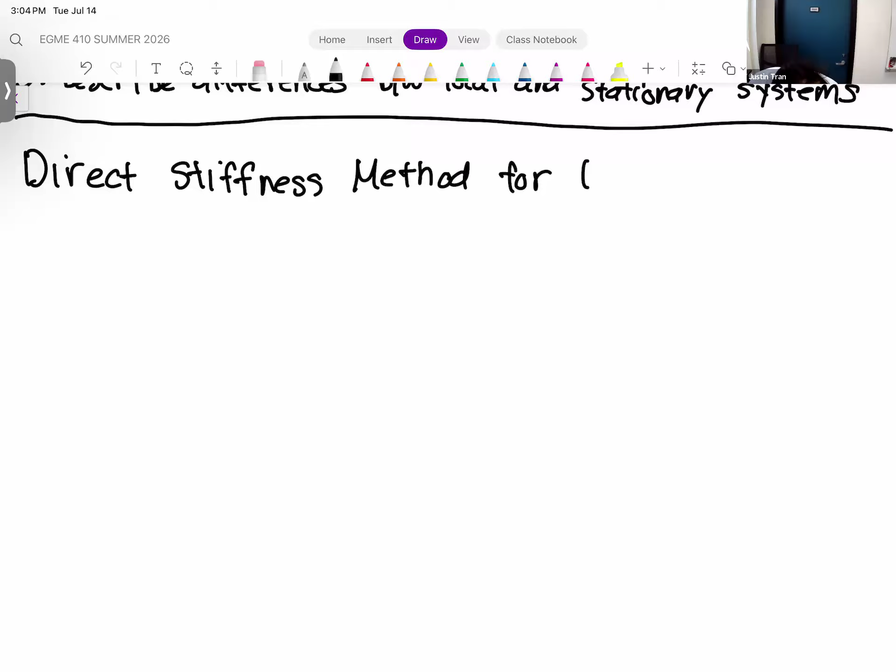I know I've said this ad nauseam, probably more times than it's almost like a broken record at this point, but finite elements is merely just a technique for solving differential equations numerically.

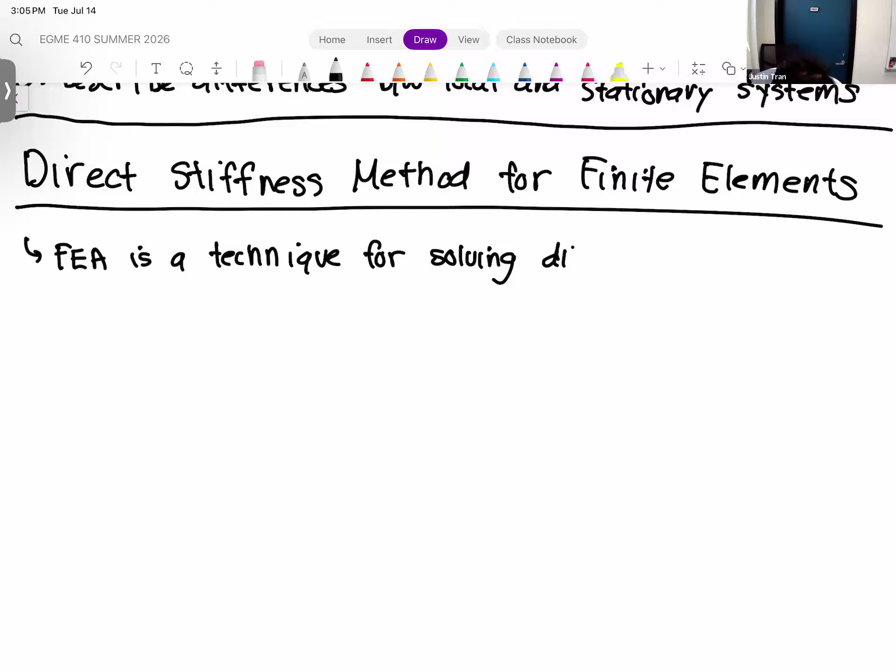I think I've mentioned this at least once every day this summer, probably more than once, but we haven't really talked about how this is done. The interesting thing is that finite elements is not just one particular technique. There are actually different ways to implement the finite element type of analysis.

Even among those different implementations, there are different variations based on certain types of scenarios, situations, or equations. So finite elements is actually a very broad topic to discuss. What we're going to cover in this class is what I would consider to be the very simplest implementation of the finite element technique, which is the direct stiffness method.

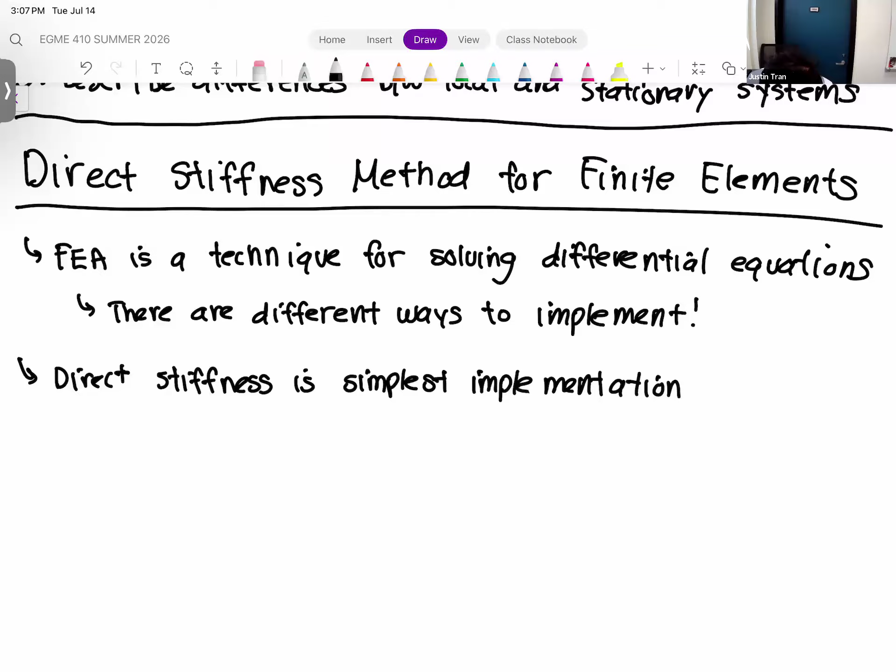Which, for this class, I think is very appropriate, because if we were to go beyond this, it would turn into a graduate level class, which we do have here — it's EGME 541. So if you were ever curious about diving further into finite element theory, that's the one you would take if you were to come back for grad school.

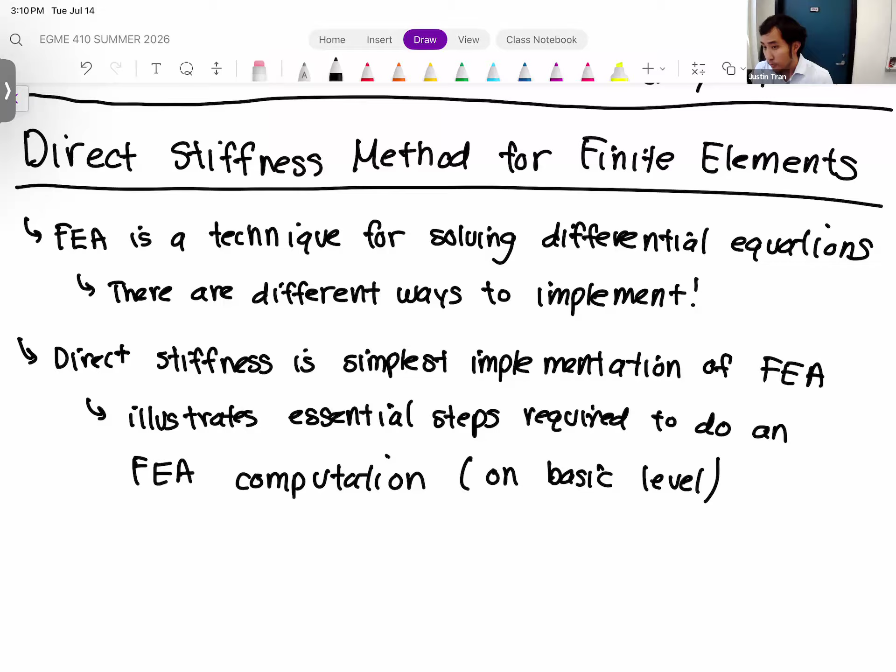But if you were to look inside ANSYS itself to see what it's actually doing underneath the hood as you do these steps, that's what I mean by the distinction. What we're going to cover today and for the rest of class on theory is specifically the FEA computation, which is different from the steps for running an FEA simulation in ANSYS.

It's a little confusing, but once we get used to this process and see what's involved, the distinction will be clearer. Before we get into the nitty gritty, I want to list out those steps. Some steps overlap with the practical ANSYS steps we're accustomed to, but there are additional steps which ANSYS essentially hides from you, since it's unnecessary for a general user to see. Step one is the same — we're going to establish our geometry.

Okay, which is the same as establishing our domain, right? So we have to have a subject, and so no matter how we approach our finite element simulation, we have to know what we're simulating on.

Step two, also very similar to our ANSYS processes, is that we need to essentially put a mesh on our geometry. But I'm going to be a little bit more specific here. In step two, we're going to break up our geometry into elements that we can process.

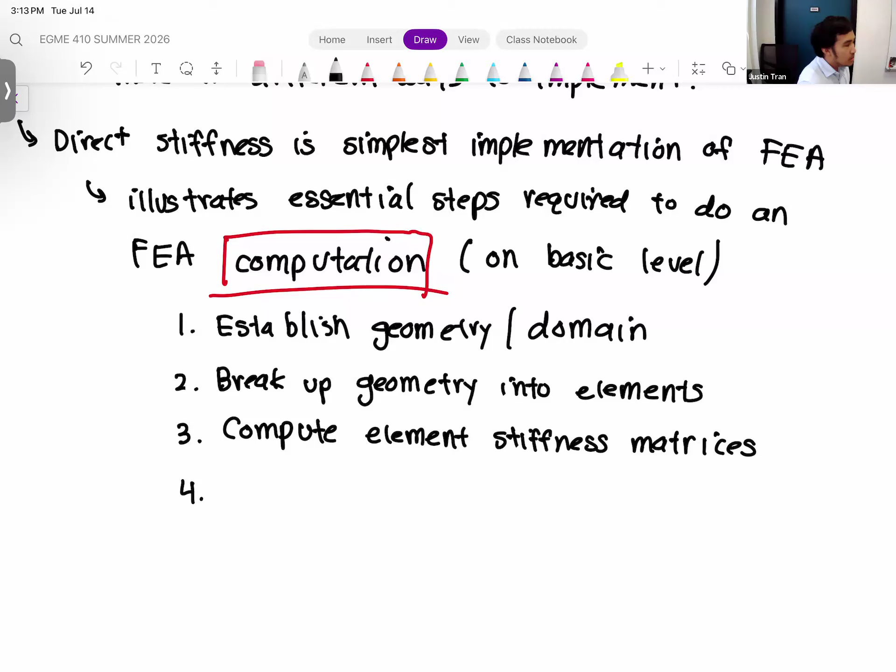Step four, after we compute all of the element stiffness matrices for all of the elements, we need to assemble them all together. We'll talk about what that process entails, but the result of step four is that we obtain a single global linear system.

All right, and then once you do that, step five will sound familiar, but the way that we actually apply that to our calculations is going to be different. So step five is we need to apply our boundary conditions, which up until this point in ANSYS has just involved clicking and establishing forces and fixed constraints. Through this direct stiffness method, you'll see mathematically how that actually works.

All right, and then after step five, we need to solve. To be more specific, we're going to solve our linear system, and that will give us our result.

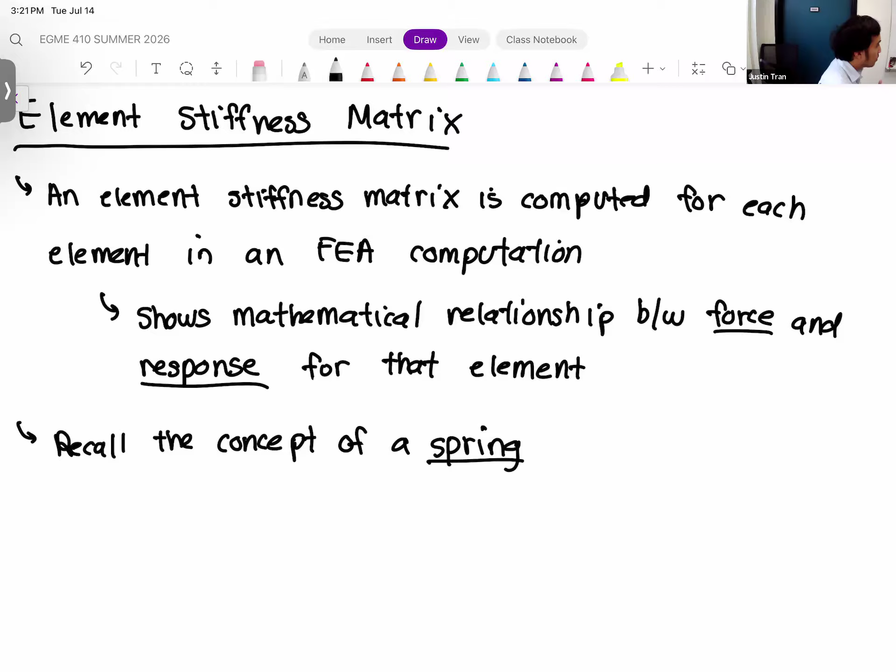So what do I mean by that? Let's bring up an old friend. Hopefully you've discussed how springs work, in multiple classes, but at least in your physics class. A spring is a very basic type of mechanical component, right? It has the ability to stretch and compress. The most basic relationship here is we have a fixed wall, and our spring is attached to the wall, like that.

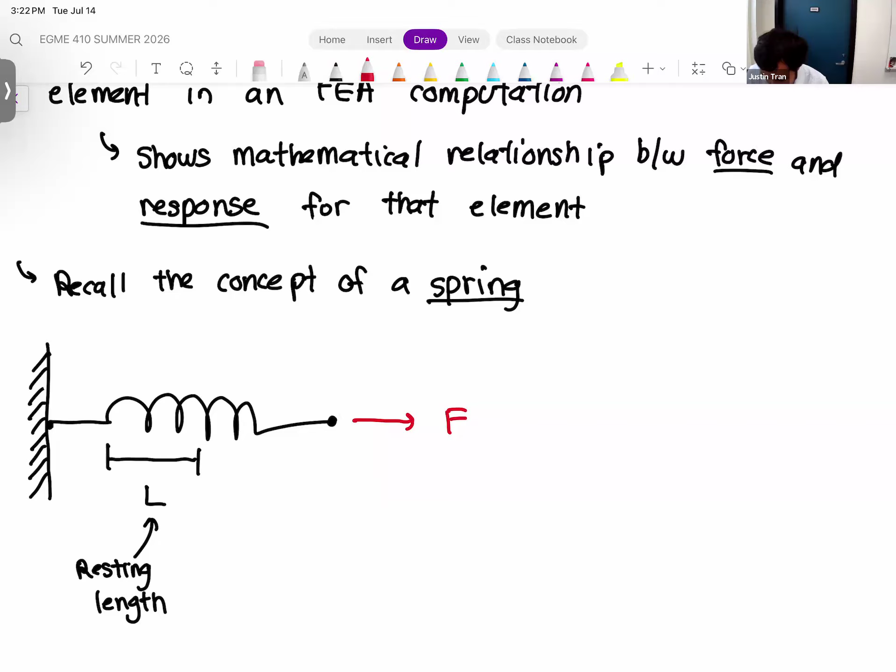Let's say we're applying a force to the spring. In this case we have a tensile force being applied, so the spring is being pulled away from the wall. What we expect is that the spring is going to stretch. Maybe before we apply the force, the spring had some length here, which we'll call L, the resting length of the spring. But as a result of applying the force, the spring stretches by a certain amount, which we'll call d.

F right here is our applied tensile force. That's the general behavior of a spring, and actually of most elastic structures. If you apply a force, we expect the structure to deform in that way, just like we've done in our ANSYS simulations. Now for a spring, the only difference is that we actually have an equation that can relate the force to its stretch length.

So the equation is: we have the force, F, is equal to what we call the spring constant for the spring, which we often give the symbol K, multiplied by the deformation of the spring. This equation is known as Hooke's law for springs. Very simply, force is equal to the spring constant multiplied by the deformation, d.

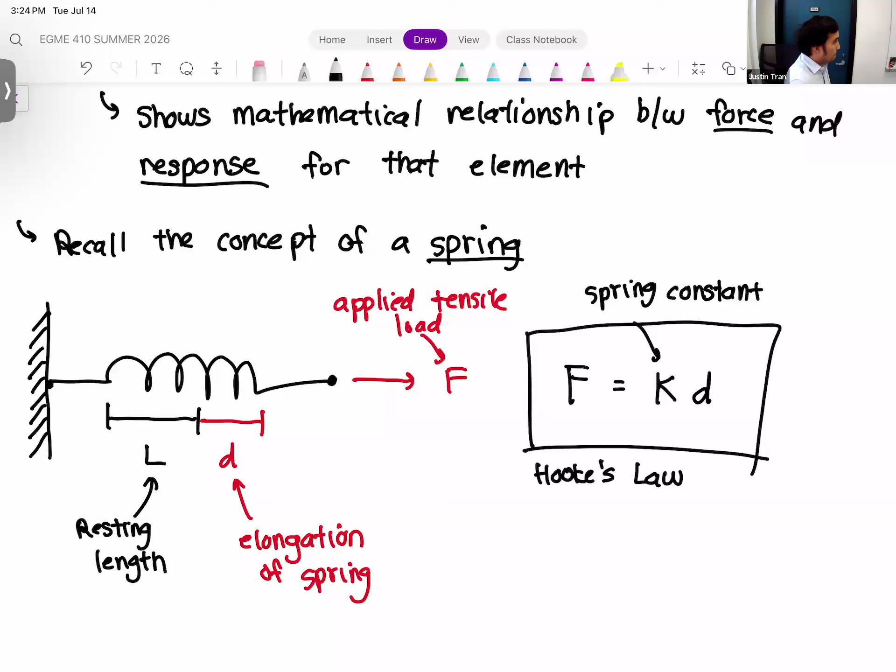So why do I bring this up? I mentioned we want to cover this concept of the element stiffness matrix, which shows a mathematical relationship between force and response. If we look at this simple spring equation, it's a great illustration of that exact concept: we have a mechanical structure, a force applied to it, and this equation tells us how that structure is going to respond, where the force is some applied external force.

If you apply an external force to a spring, it's going to respond by deforming. The deformation amount, d, whether elongation or compression, is the response of the structure in response to that applied force.

So what we have here is a simple equation that relates the force to the structural response. Now, our equation doesn't involve just those two variables. The spring constant is there as well.

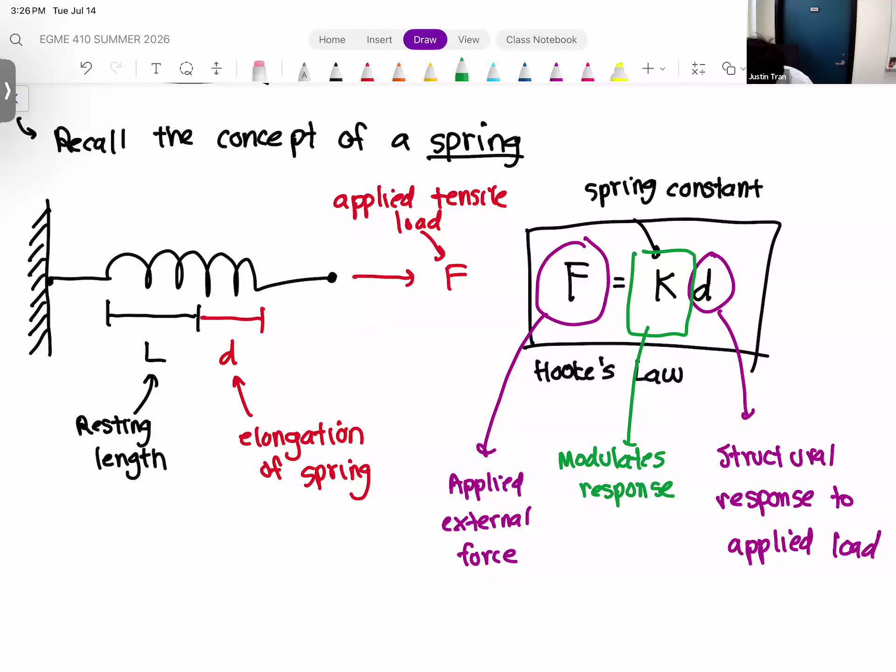That spring constant is there to illustrate the fact that whatever response we get depends on the nature, the material, and the size of the spring itself, which is illustrated by that spring constant.

So, very simple equation, right? Probably an equation you've never thought more than three times about. But there's a lot of really interesting information we can glean, a lot of different interesting ways we can interpret it, which is going to help us with our understanding of the element stiffness matrix.

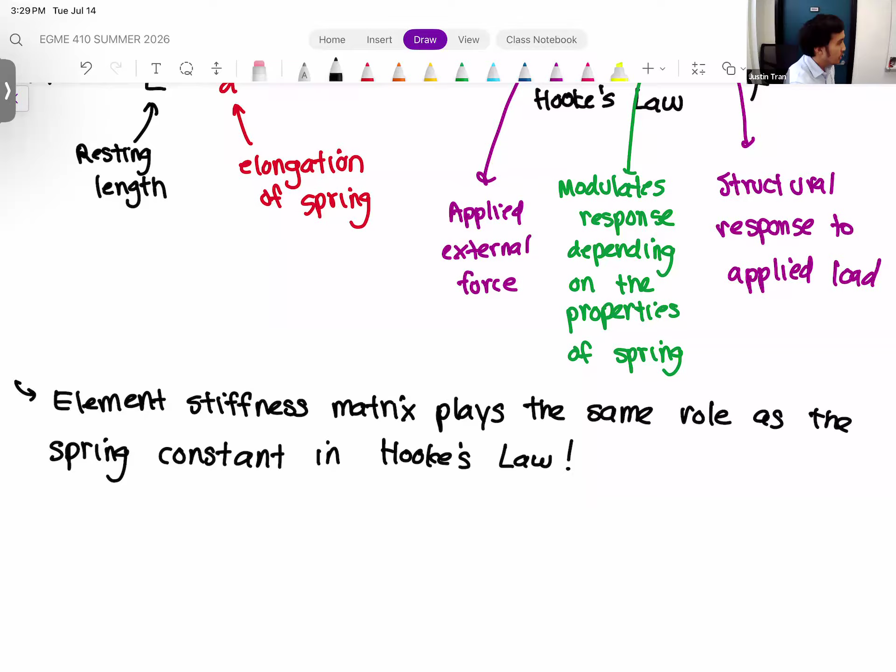Just like we've seen in our ANSYS simulations. The element stiffness matrix encapsulates that information and puts it in a mathematical way. So, the exact definition of the element stiffness matrix...

The element stiffness matrix combines all properties of our element itself, including its material properties, including its geometry.

So our element stiffness matrix will combine all of the relevant properties associated with that finite element. The main ones are going to be your geometry and material properties. That's mostly what we're going to concern ourselves with in this class, but there are other factors as well.

So it combines all these properties and gives a relationship in terms of how that finite element is going to respond to forces in a system of linear equations.

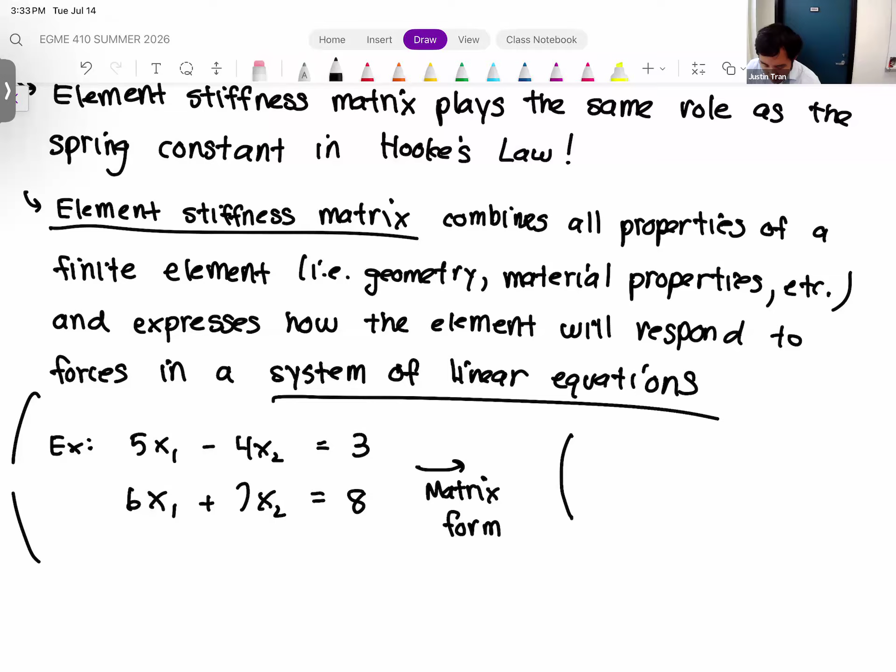So essentially, the matrix form for this set of equations is 5, minus 4, 6, 7, multiplied by x1, x2, equal to 3, 8. So that matrix set of equations is equivalent to our system of two equations, two unknowns. It just expresses it in a different way.

Now, matrix form is quite popular. It is used a lot. Maybe not necessarily for small systems like this, but if you have a lot of equations and a lot of unknowns, matrix form is quite nice. A lot of linear algebra theory and linear solver methods are based on this kind of matrix form.

So the idea with the element stiffness matrix is that our element stiffness matrix is actually going to play the role of this matrix right here. It's going to be a matrix of constants, and those constants are going to be determined based on the geometry and material properties of that element, relating the response to the force applied on that element.

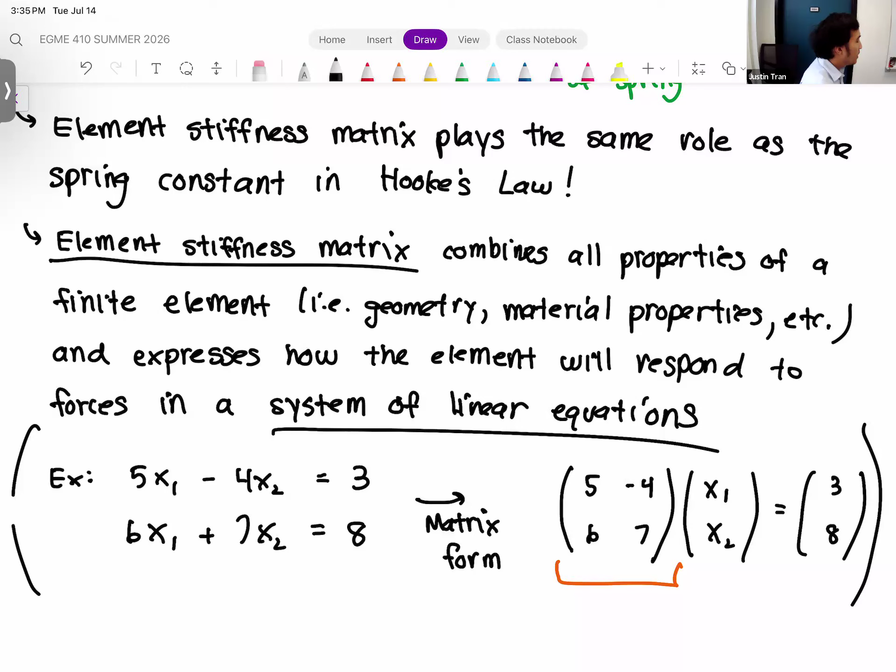So how do we actually find the element stiffness matrices? This is the part where we're going to kind of gloss over a lot of those details. Actually deriving an element stiffness matrix is pretty hard, and if we want to do this in the more traditional way, that would require more advanced math that I don't really want to get into in this class.

I think the only thing I'll say is that the derivation of these element stiffness matrices is quite difficult. It depends not only on the shape of the element, but also on the governing equations we're trying to solve. So the element stiffness matrix for a static structural simulation is going to look different than the one for a static thermal situation.

As you get into more advanced finite elements, a lot of the theory is centered around how we derive expressions for these element stiffness matrices. So we are going to simplify it quite a bit, and that's where the direct stiffness method gets its name, because we're going to more or less directly compute these element stiffness matrices, circumventing the entire process of the governing equations. But even then, it's still going to provide us a good illustration of the finite element process.

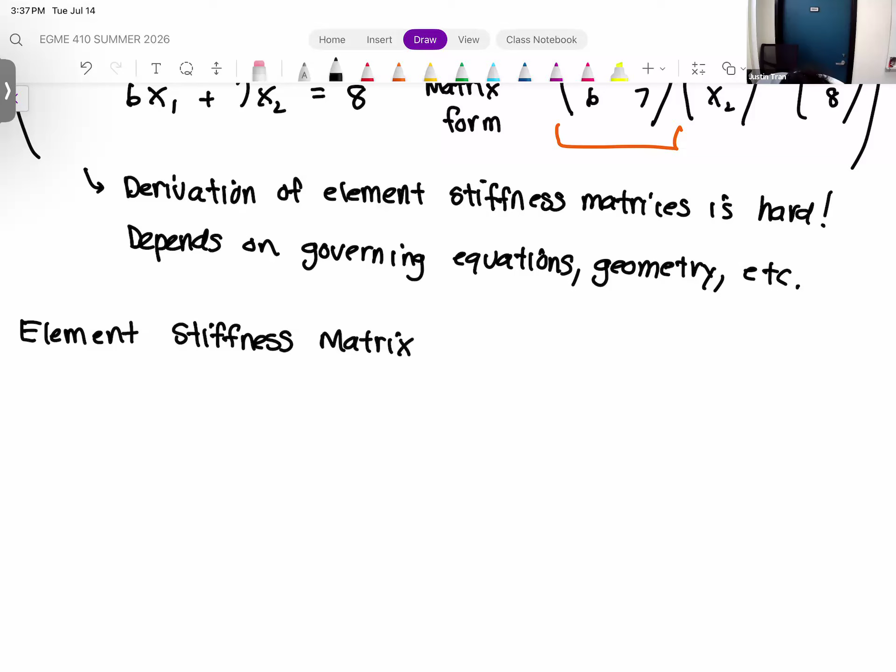So there will be at least three direct stiffness elements that we're going to cover in this class. The first one's going to be springs, which is what we're going to do today. We'll probably get to trusses by the end of this week, and then cover beams sometime next week. Okay, so let's start with the spring.

So you might be thinking, wait a minute, we've already discussed springs, right? We already have an equation that covers springs, we already have Hooke's law. So how can we get an element stiffness matrix from a system that we already kind of understand? Well...

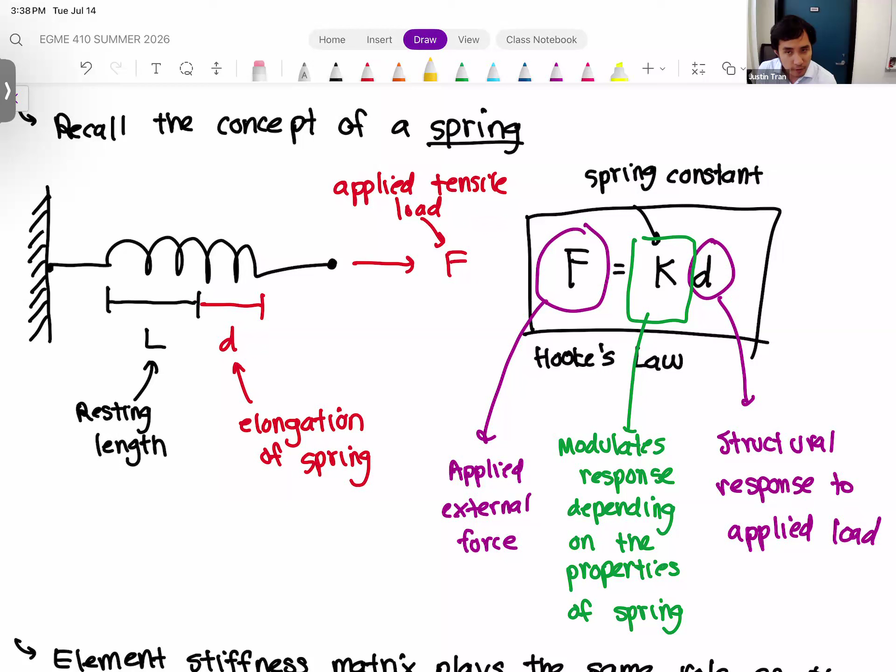The way that we obtained Hooke's law here was we had to assume that one side of the spring was fixed. The left-hand side of the spring was fixed to a wall. That way, our displacement or deformation was very easy to measure because we know one end is already going to be fixed. But what if we loosen that restriction? What if we take just an arbitrary spring with a force applied on each end?

Okay, so let's look at a spring, but instead of a force being applied only on one side and the other side being fixed, let's say we have a spring where we have a force on either side. They can have arbitrary magnitudes and arbitrary directions, and we're going to measure the deformation on each side of the spring as well.

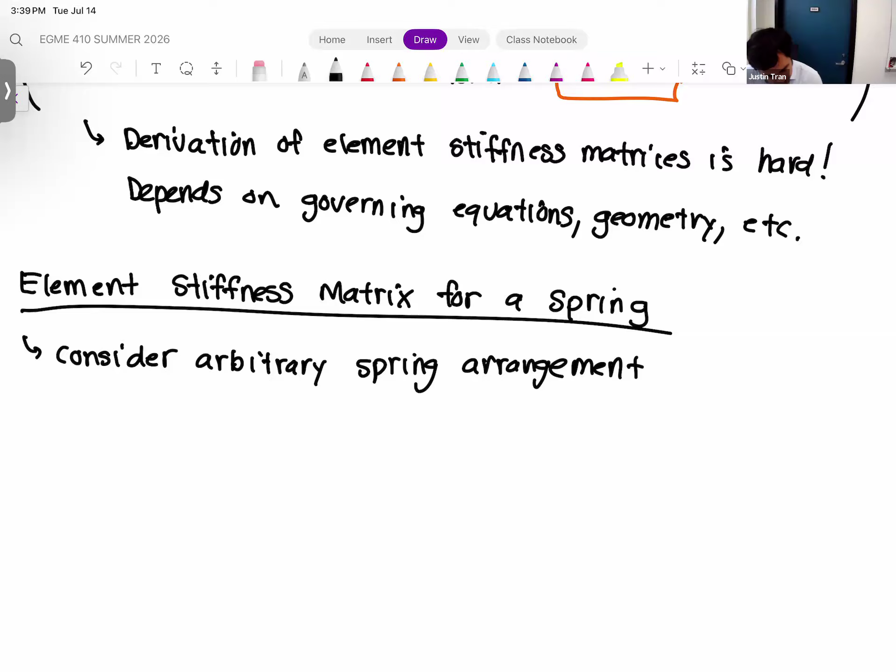So you have a spring like this. It's more or less floating in air now, not fixed to a wall. Let's say we have a force applied on the left node, F1, and a force applied on the right node, F2. Those are external forces, and right now they are completely arbitrary. I've drawn them going to the right just as a matter of convention, since generally the positive x direction goes from left to right. But very easily we could swap their directions as well.

And then in response, we're going to expect the spring to deform as well. Let me keep it consistent with the previous terminology—let's call it D1 and D2. So D1 and D2 are the arbitrary deformations of both ends of the spring.

So what we want to do is derive an element stiffness matrix that's going to relate or give us a mathematical relationship between the forces F1 and F2 and the corresponding responses D1 and D2.

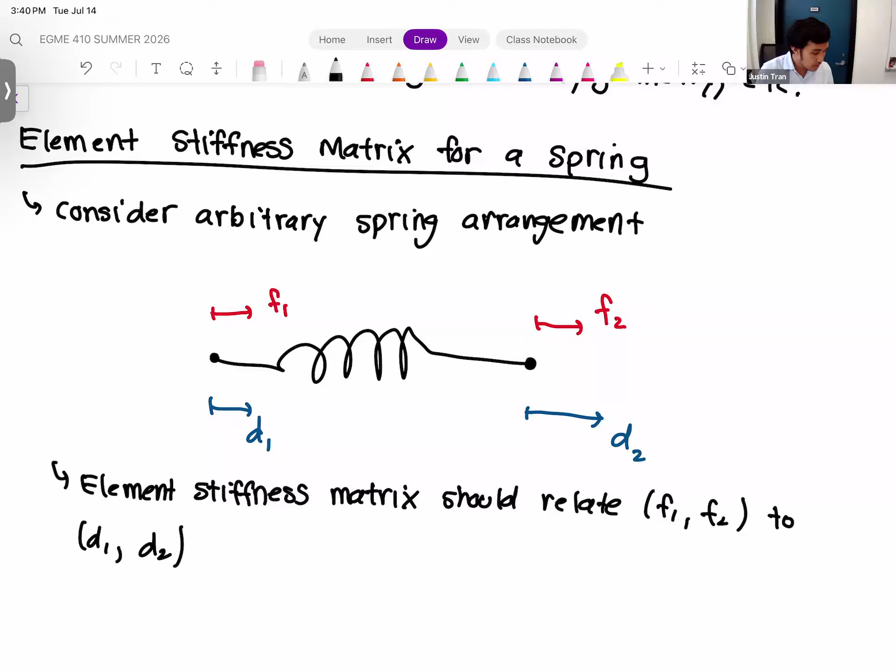All right, so essentially we seek a system that's going to look something like this. If we put it in matrix form, we have a vector F1, F2 equal to the stiffness matrix K multiplied by the displacement vector D1 and D2.

Okay, so we basically need to come up with two equations here: an equation for F1 and an equation for F2.

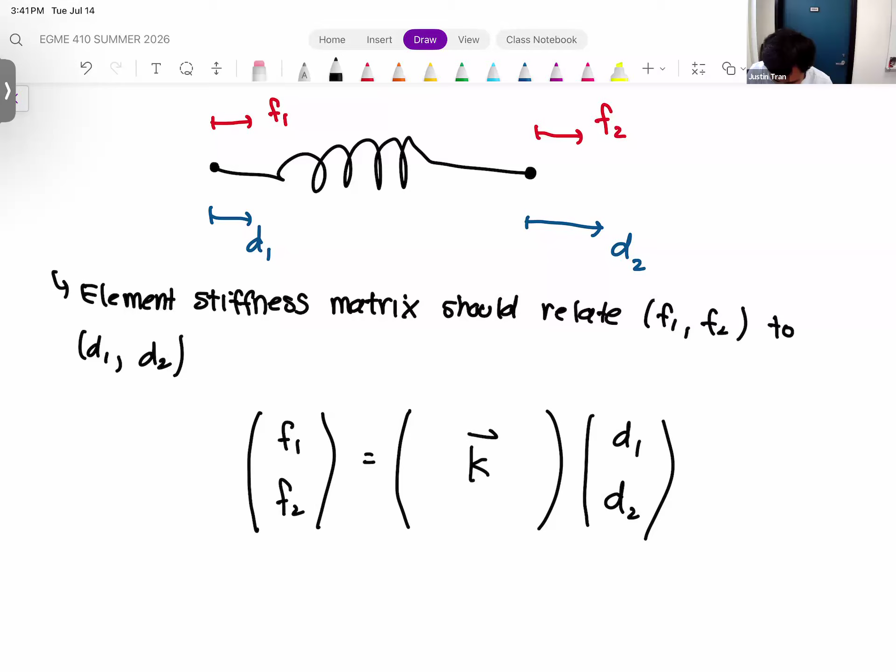All right, so to basically derive this K, we're going to look at a very specific scenario, and that scenario is going to give us the blueprint for solving these kinds of mathematical relationships. Let's consider a spring that's in static equilibrium with a tensile force applied on both ends.

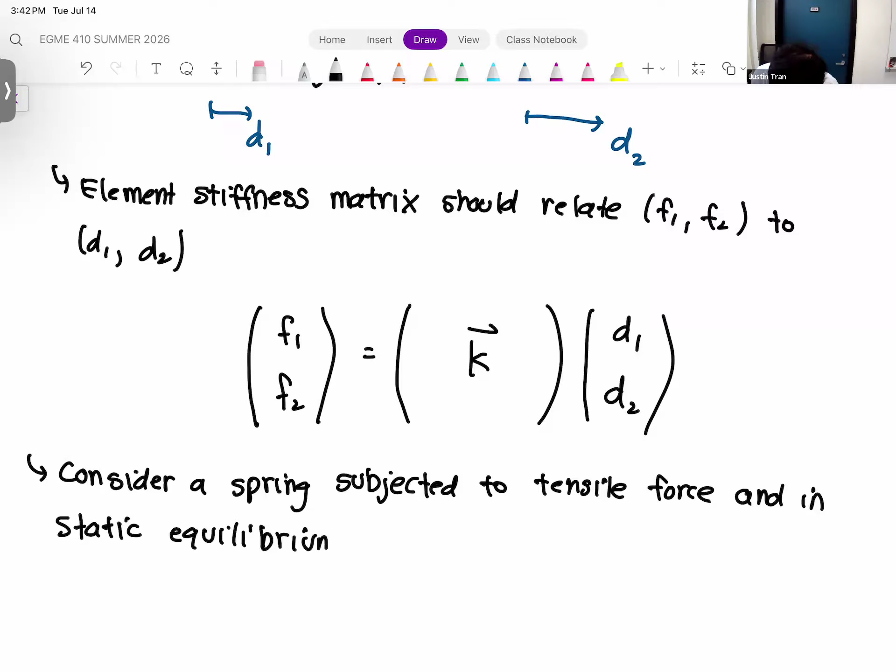So similar to the initial situation above, but we're going to be a bit more general here. We're going to have a tensile force applied on both ends, and because we are in static equilibrium, the magnitude of the forces applied on both ends have to be equal and opposite.

Okay, so we have our spring just like this. We're going to apply a tensile force, meaning we apply a force stretching the spring over to the right on the right-hand side, and on the left-hand side, we have our forces pulling it to the left. Those forces are equal and opposite, so T on the left has to equal T on the right, otherwise we wouldn't have static equilibrium.

And then what do we expect as a response? We expect the spring to elongate. We expect the left node to go to the left, D1, and the right node to go to the right, D2, relative to its resting position. So we expect both nodes to move apart from the center.

So under this configuration, we can basically compute the total deformation of the spring. Different from before, where one end was fixed, in this situation both ends are moving apart from each other.

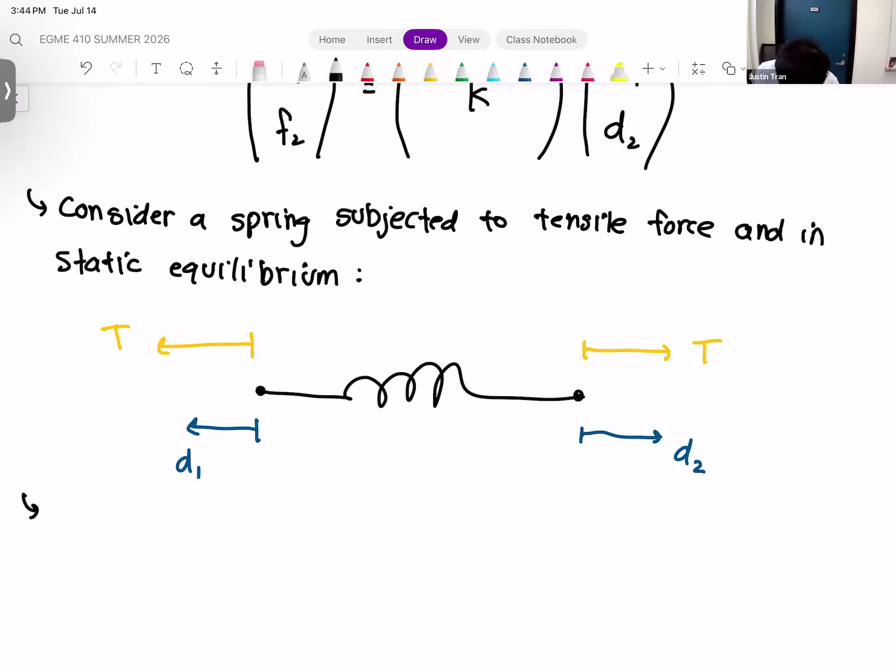So the total deformation of the spring is basically going to be the sum of D2 and D1. Let's say they both move an equal amount—say they both move half an inch. D2 moves to the right by half an inch, D1 moves to the left by half an inch. That means the total deformation is going to be 1 inch.

But in this situation, we do have to respect the directionality of our coordinate system. If we assume the positive x direction goes to the right, as it typically is, that means D2 is a positive deformation and D1 is a negative deformation. So the total deformation therefore is D2 minus D1.

Even though this spring has multiple degrees of freedom, and we now have two degrees of response here, the spring is still a spring. No matter how we dress it up, a spring is going to follow spring rules, do spring stuff. So we can still use Hooke's law to relate the tensile force to the total deformation.

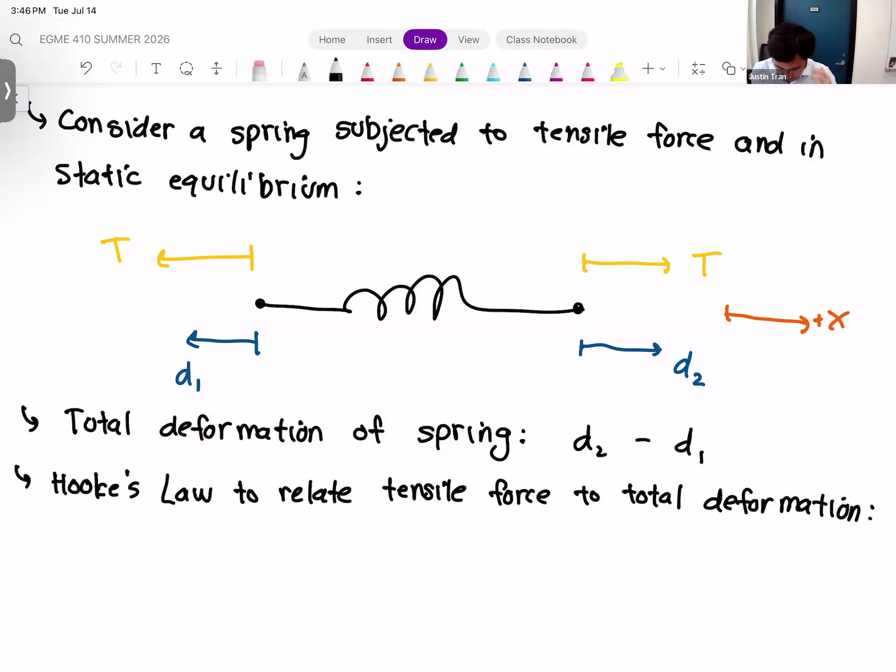And so the tensile force applied onto the spring, T, is equal to D2 minus D1 multiplied by K, which is the spring constant for the spring. We'll assume that we know the spring constant, otherwise we wouldn't be able to do this calculation.

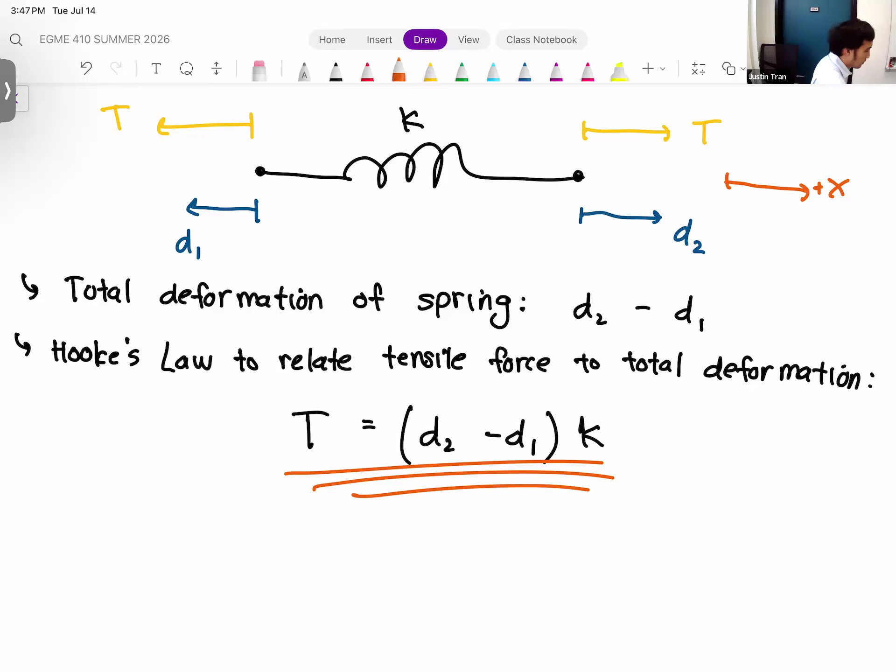And so with this equation, we have a linear equation that relates the total deformation of the spring to the tensile force. Now the next step is to take this equation and relate it to this one up here. Remember, we need two equations here: one equation for F1 and another equation for F2. That's going to give us our matrix set of equations for the entire system.

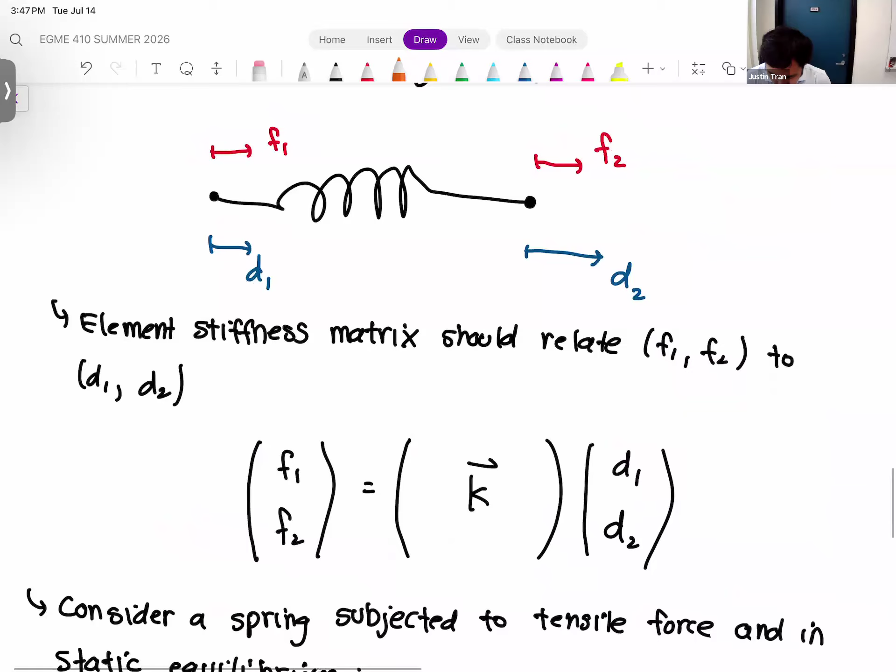So what I'm going to do is take this figure here and overlay it with this one right here, because this figure up here with F1, F2, this is what I'd call the figure for the general case, where F1 and F2 are arbitrary. And this situation with the equal and opposite tensile force is a more specific case.

So if we overlay our convention, on the left-hand side at node 1 we have F1 going to the right, and F2 is defined as going to the right as well. Remember, F1 and F2 were nothing more than the forces being applied on the two ends of the spring. And we have that here exactly already: we're applying a tensile force T on both ends of the spring. The only difference is that the directions we chose for the tensile force are different than what we chose originally for the general case.

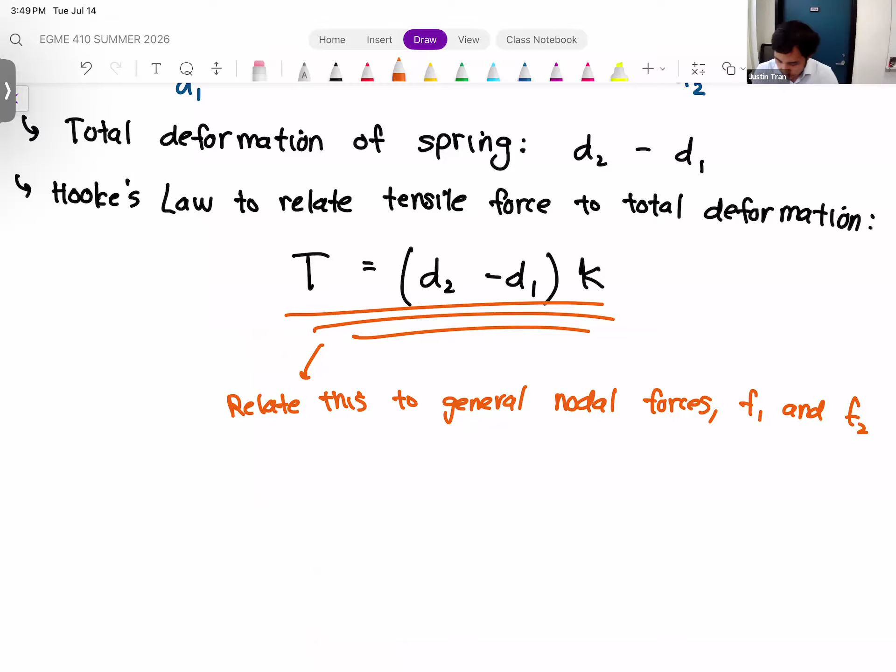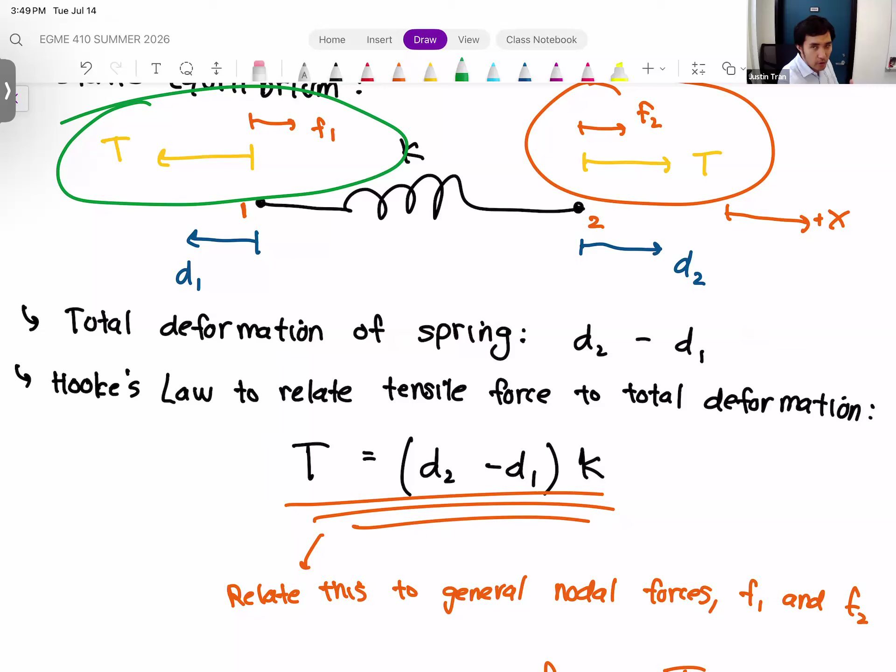So we're going to relate this general equation to our generic F1, F2 forces. Based on this figure, let's start with F2: it's going from left to right, and the tensile force T at node 2 is also going from left to right. So if we relate our specific situation to the general one, F2 has to equal T, because they're going in the same direction. Whereas on the left-hand side, at node 1, we're applying a force with magnitude T, but it's in the opposite direction of what we originally defined. So F1 for this situation is equal to minus T—same magnitude, just opposite in direction. That's why we're putting that negative sign.

Now that we have equations for F1, F2, and an equation for T, let's plug in for T into these equations. F1 is equal to minus T, so we're going to have minus K times D2 minus D1. And F2 is equal to positive K times D2 minus D1.

We're almost done, just about there. So I'm going to take F1, because I don't really like that negative out in front—let's take that negative and distribute it through the equation. All that's going to do is swap D1 and D2, so instead of D2 minus D1, we have D1 minus D2.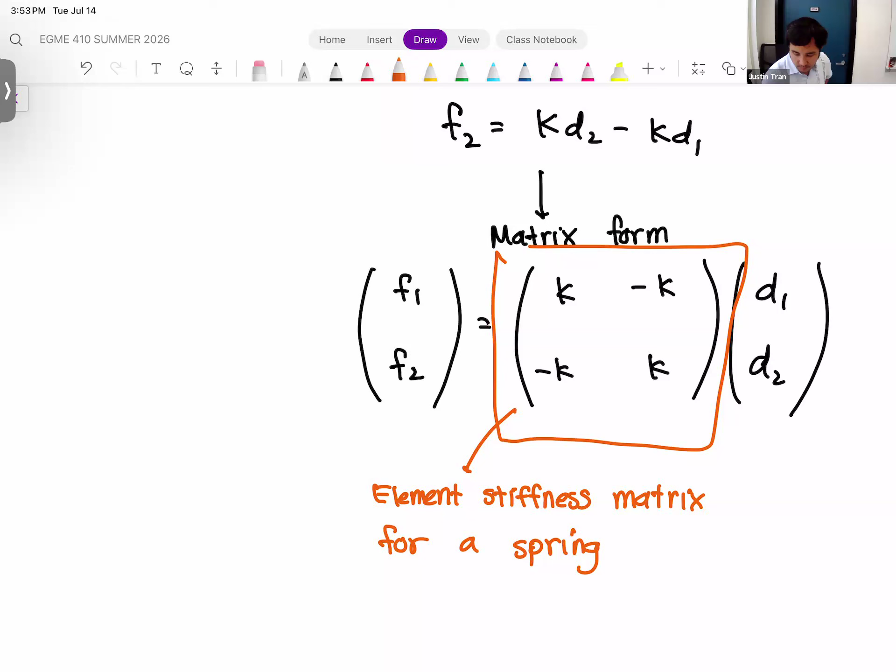There's a long road to get there, but we'll use this in an example right after this. Any questions on this?

Okay, good. So one way you can interpret this is as a more general form of Hooke's law. We're not limited to situations where our spring is fixed to a wall. We can use this elemental system to consider springs that are not necessarily attached to a wall. We can even take it a step further and use our element stiffness matrix to analyze systems with multiple springs connected to each other.

Which segues us perfectly into the next step in the finite element process, which is assembly.

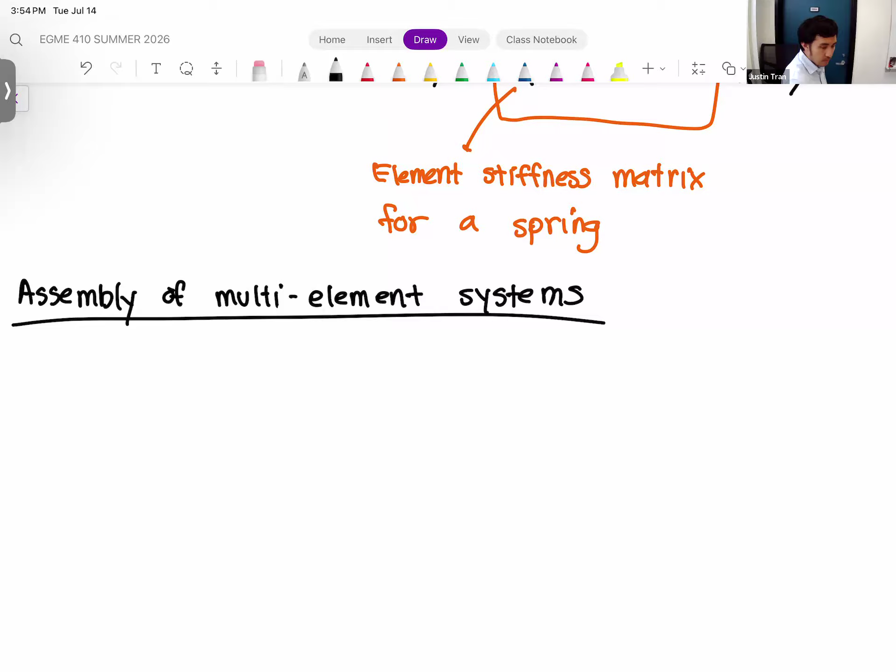Because what we know is that a finite element analysis does not just consist of a single element. We have multiple elements, oftentimes thousands or millions of elements together. So doing a finite element analysis is not just looking at one element individually, but multiple.

And as you can imagine, the different element stiffness matrices from different elements, especially elements next to each other, share nodes, or edges, or in 3D, surfaces as well. Their solutions are going to be linked together. So the next step is to say: if we have multiple elements, how do they interact with each other? How do we combine their element stiffness matrices?

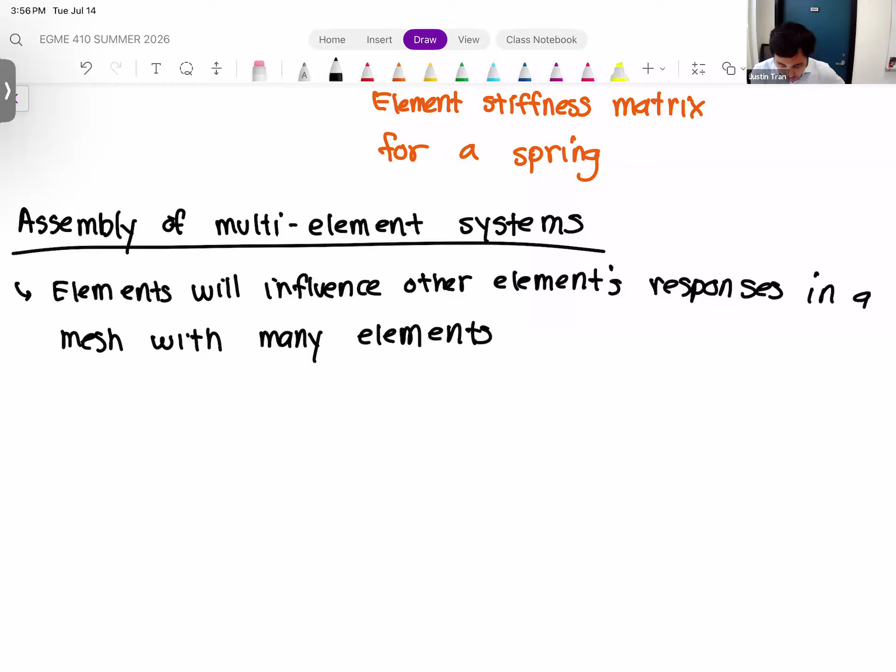The next step in the process is determining how this influence occurs. In other words, how do we combine multiple elements? To illustrate this, I'm going to do an example. It'll be like an example, but one where we work through the theory and use it to illustrate things.

Let's consider the absolute simplest situation here. Question from the chat: so what we did here is find the element stiffness matrix for a free spring by relating it to a static spring, the case of one fixed end. Yes, exactly. We took our basic spring with a fixed end and generalized it to a situation with 2 degrees of freedom, where both ends are free to deform.

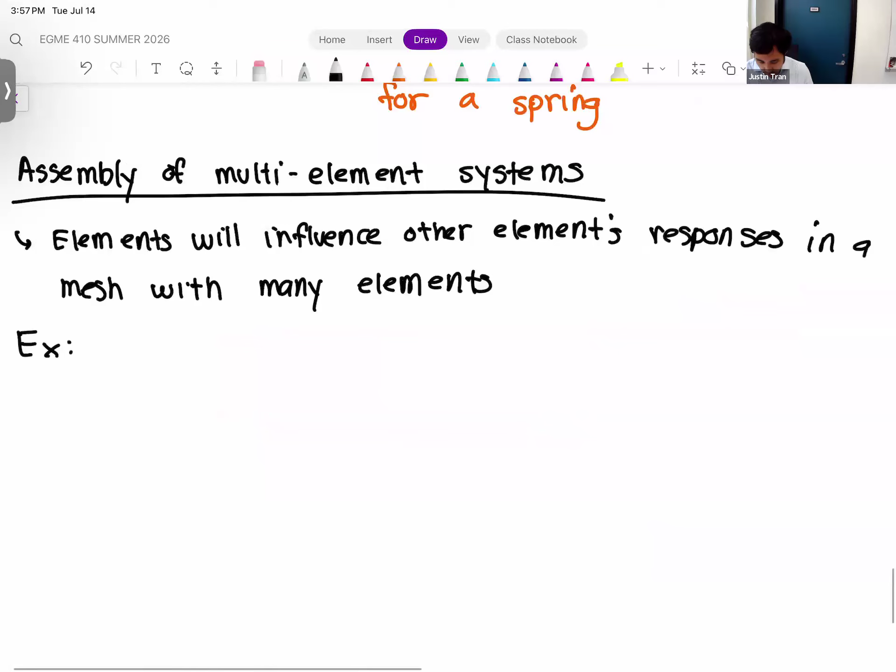Let's look at the simplest kind of assembly of different elements, where instead of one spring, let's consider 2 springs connected to each other. Let's have a fixed wall, since we do need a fixed constraint—the rules of finite elements don't really change for direct stiffness; we still have to have a fixed constraint. So we'll have one spring directly connected to the wall.

We'll call this element A, with spring constant Ka. This is connected to another spring, which we'll call element B, with spring constant Kb. We're not making any assumptions about the spring constants of these two springs—they could be the same, but in general they could be different.

Just like before, we are going to apply a tensile force—on this entire system, we'll have a force pulling the entire assembly to the right. What we're interested in is the response or deformation of each of the nodes in our system. So we have node 1, attached to the wall, and node 2, which is in between springs A and B.

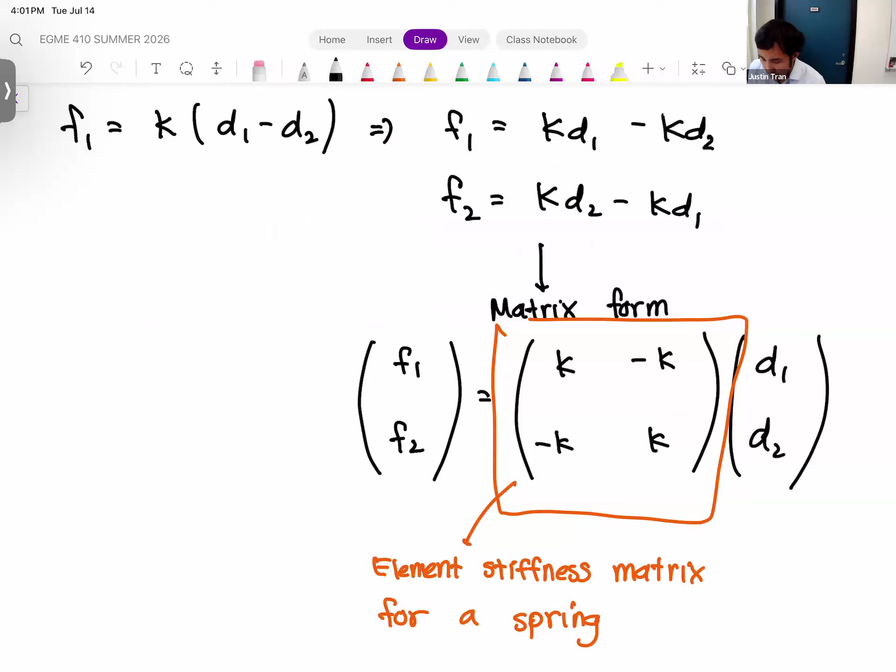Next thing to do is we need to compute the element stiffness matrices for each spring. So for spring A, element A, and spring B, we compute its element stiffness matrix. We're basically going to follow this exact kind of formula up here, except we're going to apply that to each of the different elements. We'll start with element A.

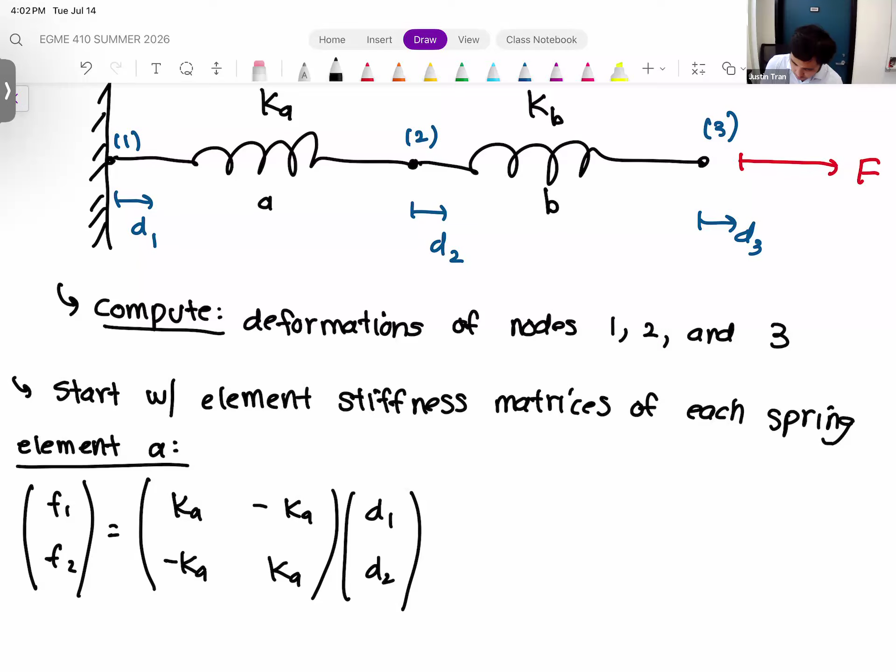The only thing to note for element A here is that its spring constant is Ka. So the element stiffness matrix for this is going to be F1, F2 — multiplied by the corresponding responses of each of those nodes, D1 and D2. The spring constant for element A is Ka, so we're going to have a positive Ka, minus Ka, minus Ka, positive Ka. Okay, so that's element A.

Let's do the same thing for element B. Since element B has a different spring constant, that means our matrix is going to involve that different spring constant as well. So our matrix for element B here is going to be a positive KB, minus KB, minus KB, positive KB. Right, so that part's straightforward.

But we also make note of the fact that element B here, the nodes that it's connected to are nodes 2 and 3, which is different than element A. Element A is connected to node 1 on the left, node 2 on the right, but for element B, it's connected to nodes 2 and 3. So we need to adjust for that in our equation.

So instead of having a vector F1, F2, we're going to have a vector instead F2, F3. So F2, F3 is equal to positive KB, minus KB, minus KB, positive KB, multiplied by the vector D2, D3. So those are two separate linear systems for each of those elements there.

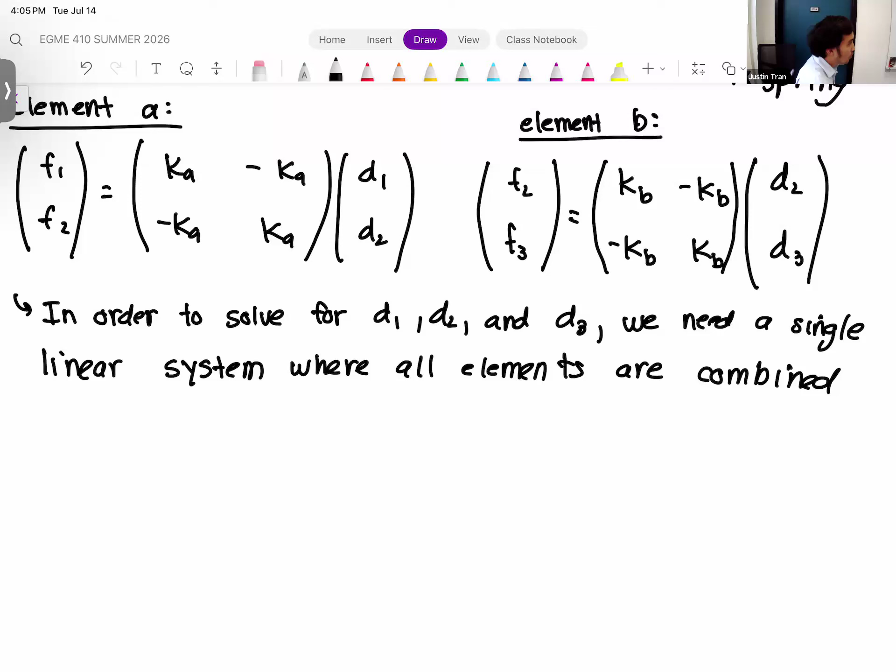Okay, so the way to do this is like this. To start constructing your global linear system, you need to look at how many nodes are in your mesh. In this mesh in particular, we have 3 nodes — node 1, 2, and 3. That means our system is going to have 3 rows and 3 columns.

The size of your global linear system depends on the number of degrees of freedom in your mesh. For now, since we're just doing one-dimensional spring problems, the number of rows in your global linear system will just correspond to the number of nodes. But starting Thursday, we'll look at two-dimensional systems where each node can have multiple dimensions of deformation, in the x and y directions. That gets more complicated, but for now, just think of the number of nodes as equal to the number of rows.

Our global linear system is going to have a very similar form to our elemental systems. Just like our elemental systems, we're going to have a vector with all the nodal forces: F1, F2, F3. We're going to have a large matrix portion here, where our 3 by 3 matrix goes. Since this is a stiffness matrix corresponding to the entire system, we call it the global stiffness matrix. This is multiplied by our vector of responses: D1, D2, D3.

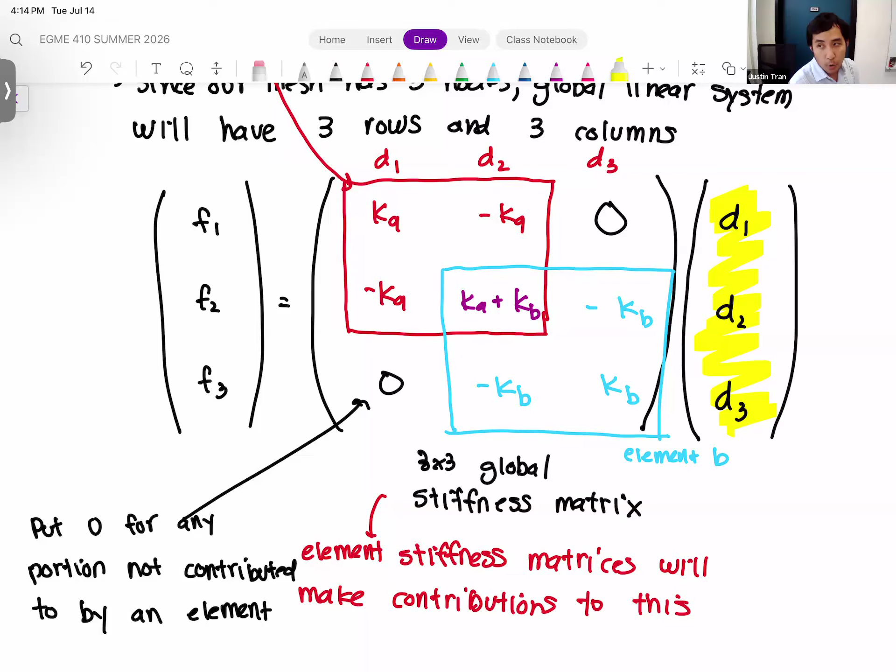So now that we've assembled this, we have a single linear system. Our goal is still the same — to solve for the values of D1, D2, and D3. Now that we have this in a single linear system, we have essentially three algebraic equations for our three unknowns, so we should be able to solve this system. Because that's what algebra tells us — if we have the same amount of equations as unknowns, then we should be able to solve our system.

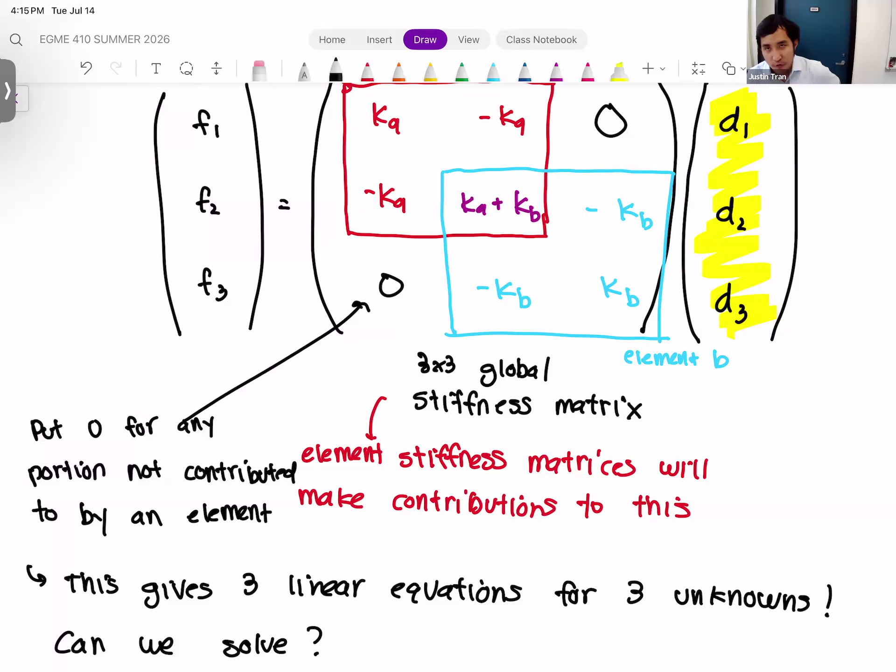But if you know how we do these things, I make a point but then I answer it right after, and usually the answer is no. In this case, we don't actually have enough. On the one hand, we have all of the force values on the left-hand side — F1, F2, and F3. You can think of these as placeholders for forces, but we haven't actually applied anything there yet, because those are the generic variable names for the nodal forces on our system. So before we solve, we need to input forces for these placeholders.

We can't solve a linear system if we don't know what the forcing vector actually is. But there's another issue as well. If you look at the matrix we just created, let me draw a line right down the diagonal, just like that. I've drawn a line down the main diagonal of the matrix, and what you should see is that our matrix here is actually symmetric. So if you consider that green line as a mirror, our matrix has a mirror image on both sides.

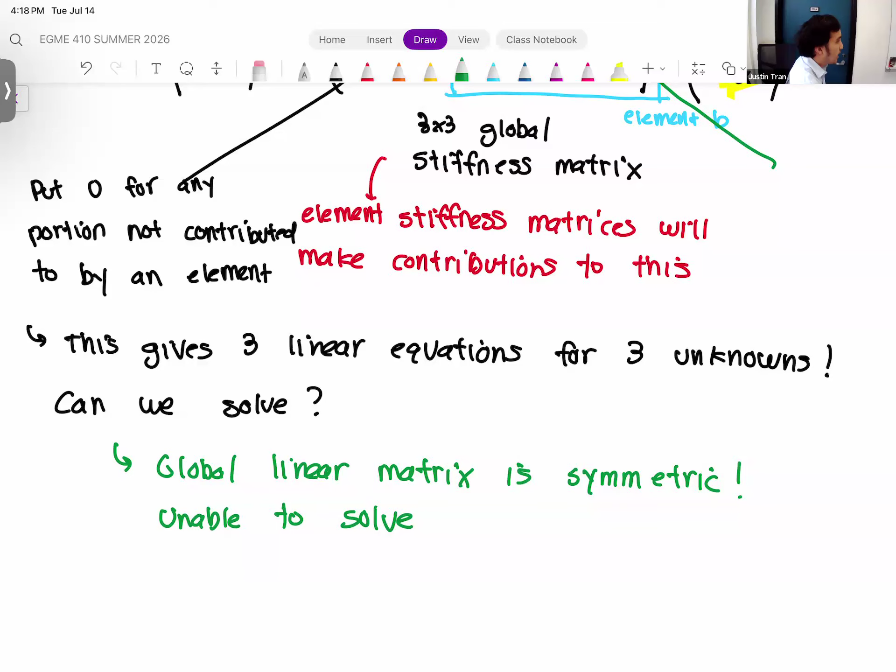We're not going to get into the specifics of condition number and determinants and things like that, because that's beyond the scope — this is not a math class, this is a finite element class. But just know that if you have a symmetric matrix, you can't solve that linear system just yet. So we're not quite done. Before we actually solve for the solution, there's one more step that's going to solve both of these problems at the same time, which is applying our boundary conditions.

Which, if you take a step back and think of our ANSYS process, we couldn't solve any of our ANSYS simulations until we actually applied the boundary conditions. The only difference now is we're going to see mathematically how those boundary conditions actually get applied to our system. We'll do that after the break.

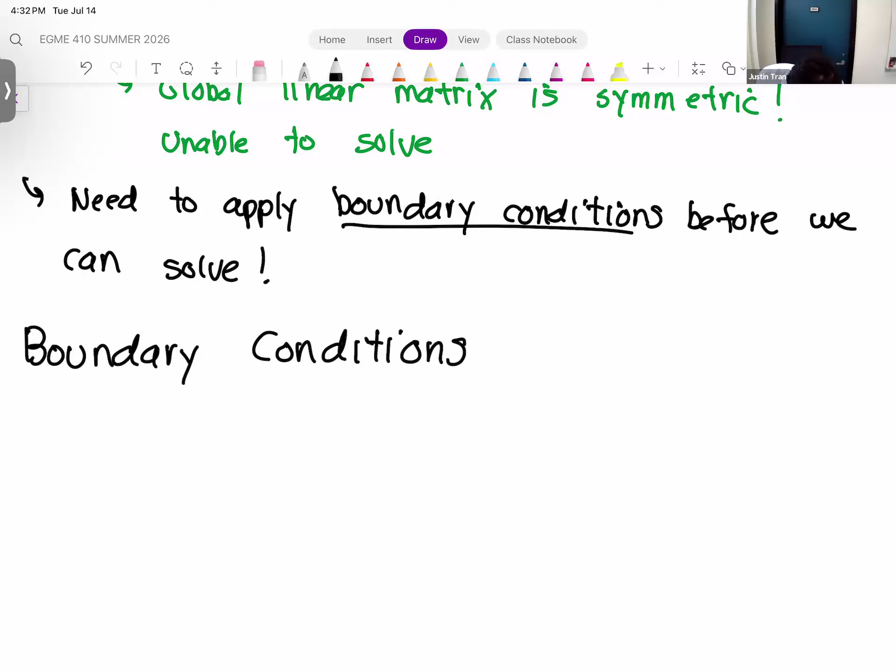Okay, so we should be familiar with boundary conditions - this isn't the first time we've seen them. Just to refresh your memory, the reason we apply boundary conditions in finite element simulations is they are meant to model and emulate any external effects being applied onto our system.

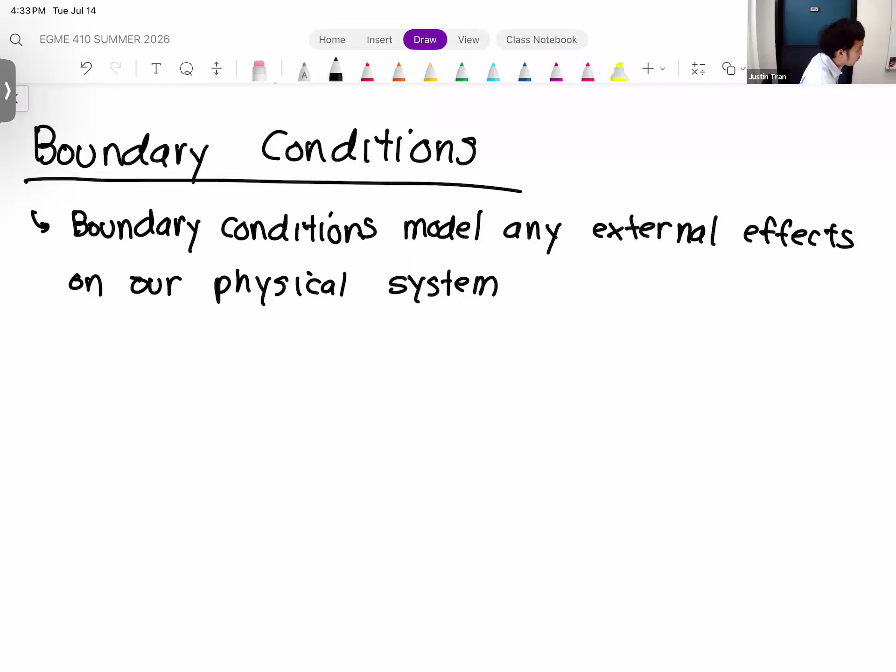And what we've already discussed is that there are two types of boundary conditions: constraint type and load type. Let's refresh our memories in terms of what those mean.

Okay, so constraint type boundary conditions, if you recall from our discussion a couple weeks ago, directly specify the value of our primary variable. So whatever the primary variable is for our solution, our constraint type boundary conditions will be a direct specification of that. That statement will have a bit more context now that we're actually going through the math, and you'll see what that actually looks like in our matrix system.

And the other type of boundary condition is load type, which at the time we discussed as any such effect or external effect that's going to have an indirect influence on the value of our primary variable.

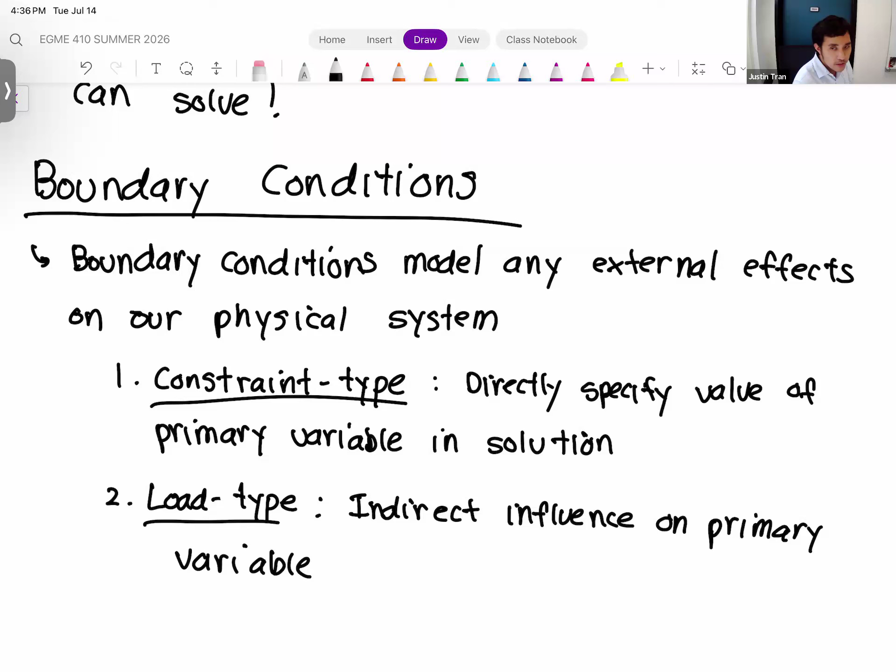That's different from constraint type, where basically wherever we apply a constraint, we say the deformation has to be 0 at that location. So we have a constraint type boundary condition on our simple spring system, and we have a load type as well. So, so I don't have to keep scrolling up and down, let me go ahead and draw the system here one more time.

All right, so we have our two springs here. They are connected in series, one connected after the other. We have a force being applied on the right-hand side, and on the left-hand side, we have our spring fixed to a wall.

Based on how I drew this, you can see we have two boundary conditions. On the left-hand side, just like we've seen in our ANSYS simulations, a fixed support means we have a constraint type there, whereas the force on the right is going to be a load.

So let's see how we specify these mathematically. Let's start with the constraint type, because that one's pretty straightforward. Remember how we've labeled the nodes: the node attached to the wall is node 1, and I've labeled node 2 and node 3. If we're constraining our system such that node 1 is fixed, we're basically saying the deformation at node 1 has to be 0.

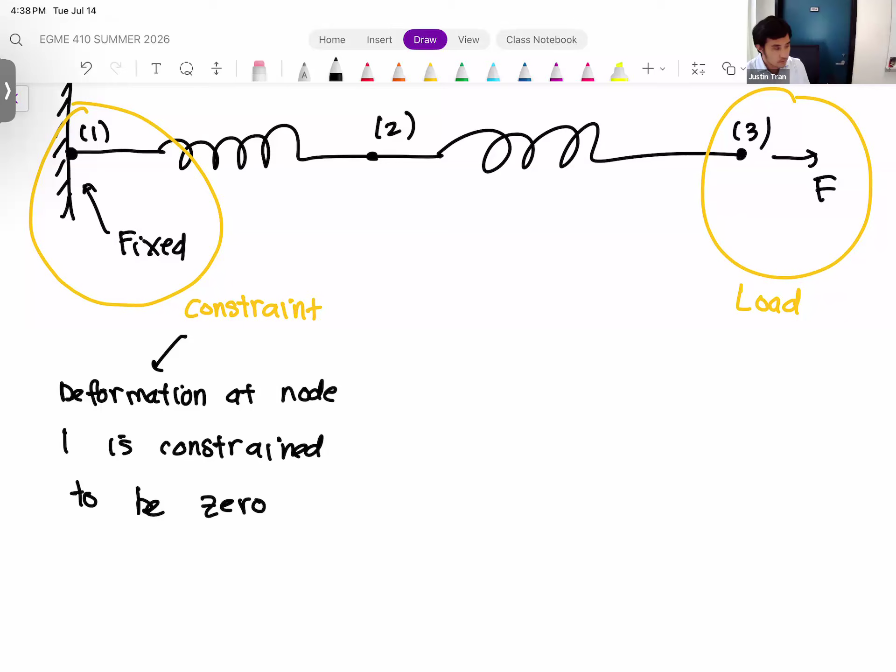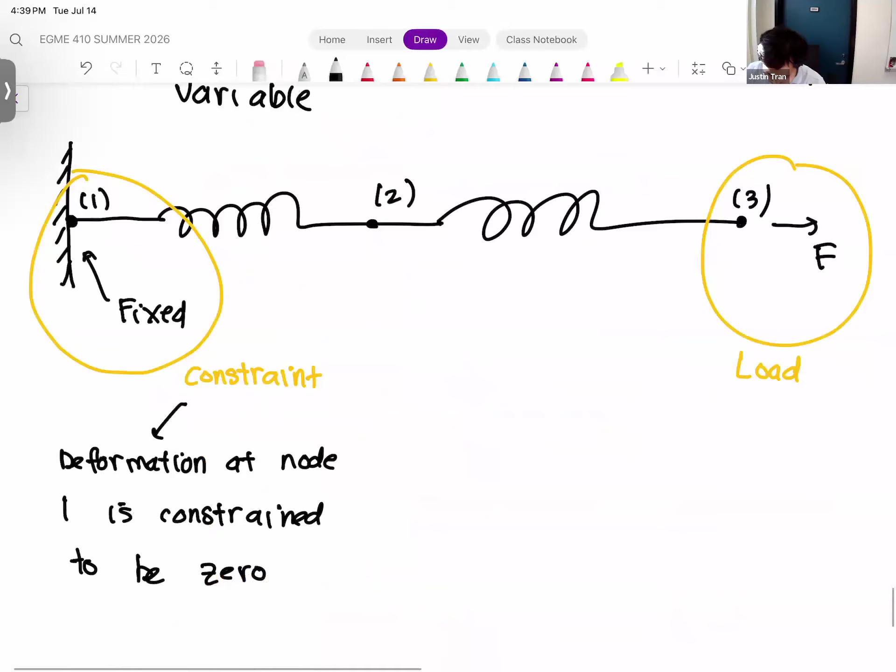So we can write a straightforward mathematical expression for this. If the deformation at node 1 is 0, and if we look at our linear system, we have a variable there that we're already computing for the deformation of node 1, that's d1. That means the only way for this to be satisfied is we make the equation d1 equal to 0.

That expression fits exactly with our definition for a constraint type boundary condition, because for constraints, we're directly specifying the value of our primary variable. Our primary variable here is the deformation, and by directly specifying that the deformation at node 1 has to be 0, that is as direct as it can be. So it makes sense that the deformation at node 1 is 0, and that's mathematically how we express that.

Now the next question is, how do we take this very simple equation, d1 equal to 0, and incorporate it into our global linear system? Because ultimately, when we solve our global linear system, we want that solution to reflect this constraint.

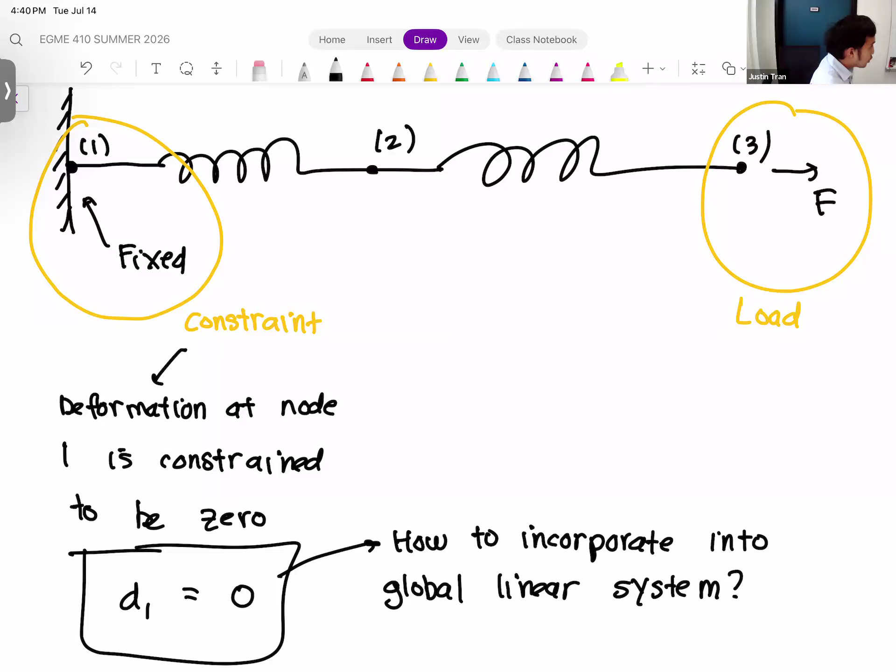To do that, I'm going to take this simple equation and make it seem more complicated than it is. What I'm going to do is modify it so that we can also include D2 and D3. If we take those unknown variables and multiply them by 0, it would be as if they don't exist, but at least we can include them in the equation mapping.

So instead of D1 is equal to 0, I'll write D1 plus 0 times D2 plus 0 times D3 is equal to 0. In fact, we could be a bit more pedantic and say that D1 is multiplied by 1.

Normally you wouldn't do this. You wouldn't bother writing 0 times a variable because that 0 will just cancel it out. That's normally what you do, if you have 0 multiplied by a variable you just don't bother. But then if we do that, we end up right back where we started.

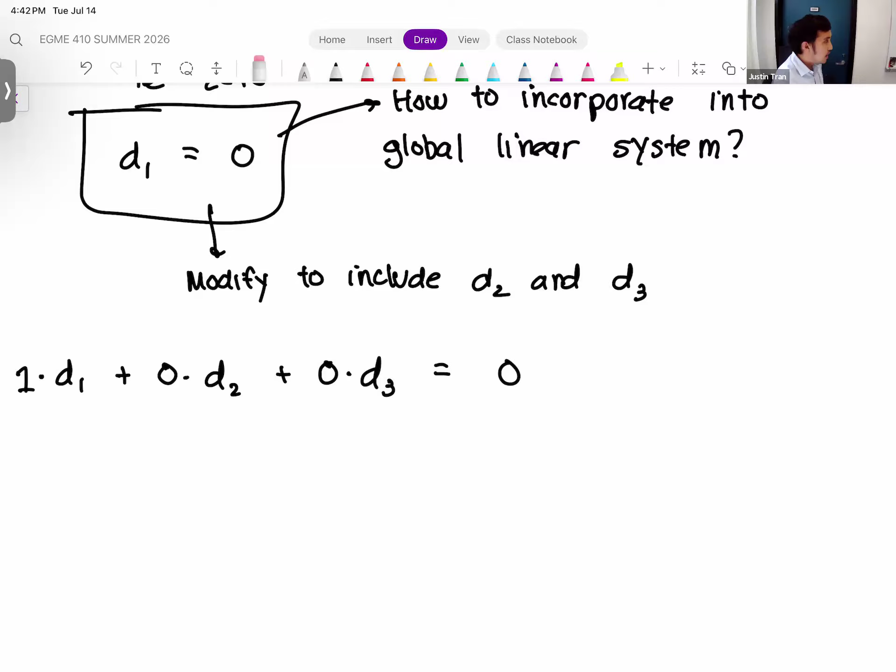The reason I did this is because if you look at our global linear system, I know it's kind of a mess at this point, but just try to focus on the first row. Let me clean it up a little bit just to make it easier to see.

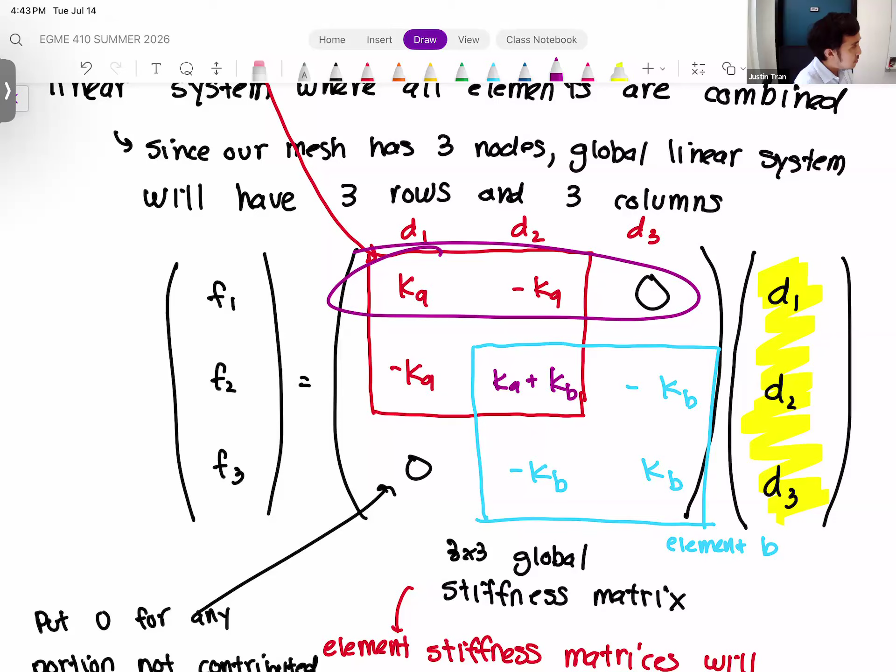So if we look at the very first row of our stiffness matrix, remember each row in the stiffness matrix and this entire linear system corresponds to a linear equation, as we discussed before. This matrix is nothing more than a representation of 3 equations and 3 unknowns, the first equation being the multiplication of that first row and this vector here. So if we were to multiply this out...

So if we were to multiply out, we basically would take the coefficients of our global stiffness matrix and multiply it by our unknown vector. We would get the following equation: F1 is equal to Ka times D1 minus Ka D2 plus 0 times D3.

So if you go back to our system, linear system, and multiply that row by the column, that's what you get. Now this equation that we are saying represents our constraint is in a very similar form, although the left and right are kind of swapped.

So what if we do this? What if we take this constraint equation and put it in a pseudo matrix form? Now we can't make a full 3x3 matrix because we don't have 3 equations, but we could put it into a kind of vector form.

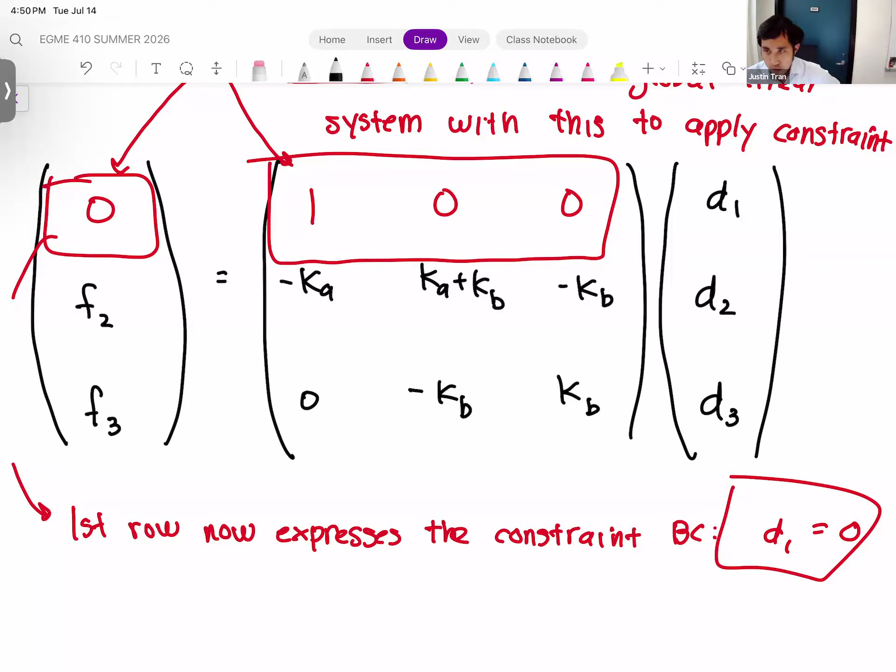now expresses the constraint boundary condition. So our very simple constraint type boundary condition equation, d1 is equal to 0, has now become an entire row in the matrix. That's how you deal with constraint type boundary conditions. So essentially what you're going to do is first form the very simple equation of what the boundary condition represents, and then use that to replace the row in the matrix that corresponds to that node.

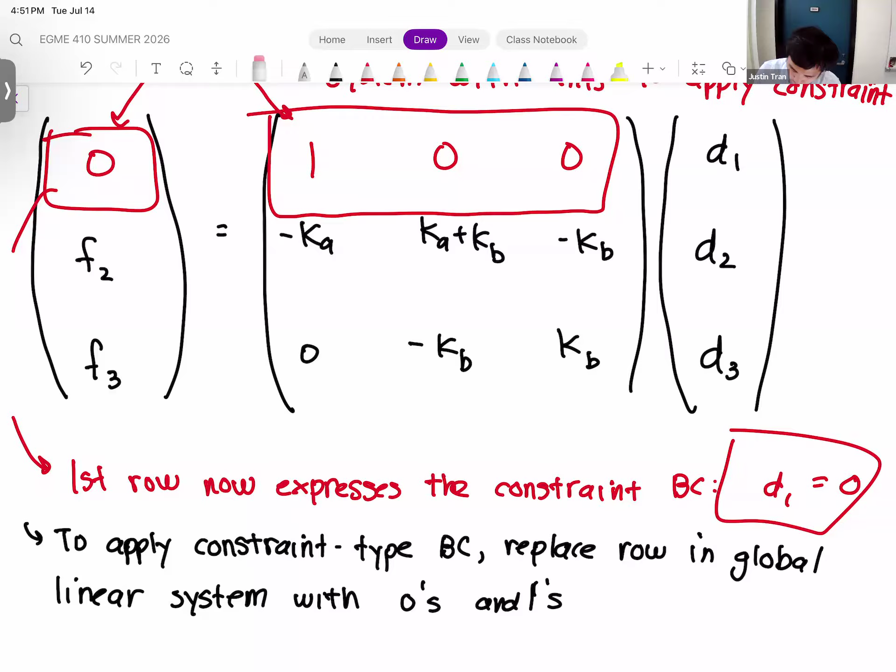It's not multiple ones, actually, it's just a single one. And actually, it's not only just a single one, but that one is going to go in the place of the main diagonal.

So in this situation, our constraint boundary condition is on the first node, and that means first of all, we're replacing the first row in the matrix, right? We're going to put zeros on every single entry in that row except for the main diagonal.

And so the main diagonal for the first row is the first column. But if our fixed constraint boundary condition is on node 3, we would replace the third row in the matrix with all zeros, but then the 1 would go on the third column.

So whichever is the main diagonal, that's where you put the 1 for your constraint type boundary condition. And for structural simulations, the only constraint type boundary condition we will apply is a fixed support, and that means on the forcing vector, we're always going to put a 0. But the part where you need to worry about is where you're going to put the 1 for the constraint type.

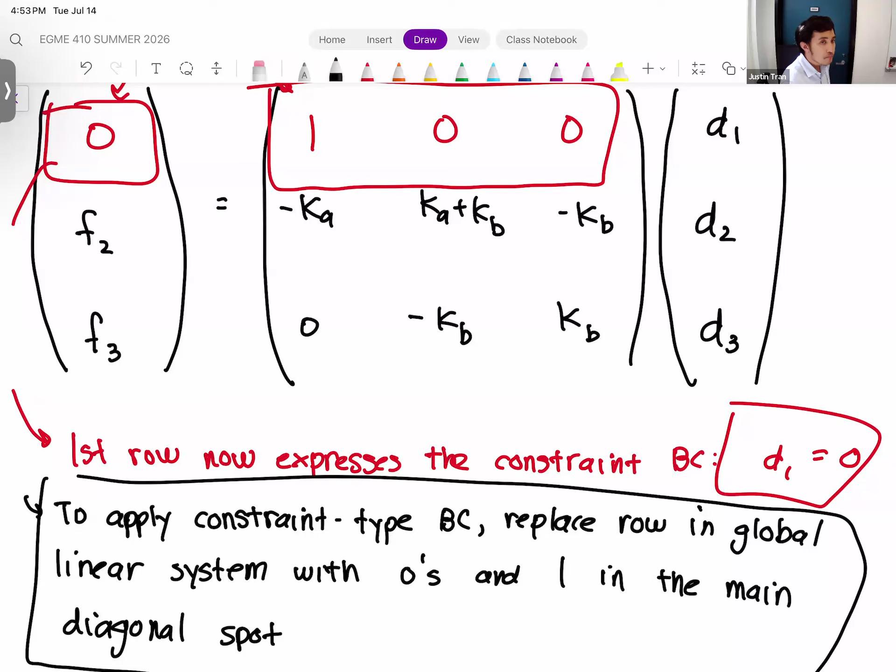Any questions on this so far? Constraints. Okay, good. So that's the constraint type boundary condition.

So constraints are a little bit more involved, and you actually have to replace a row. Loads are actually quite simple to apply.

So for load type boundary conditions, what you need to do is basically just take note of which node the load is being applied onto, and then just replace that value in the forcing vector of our global linear system.

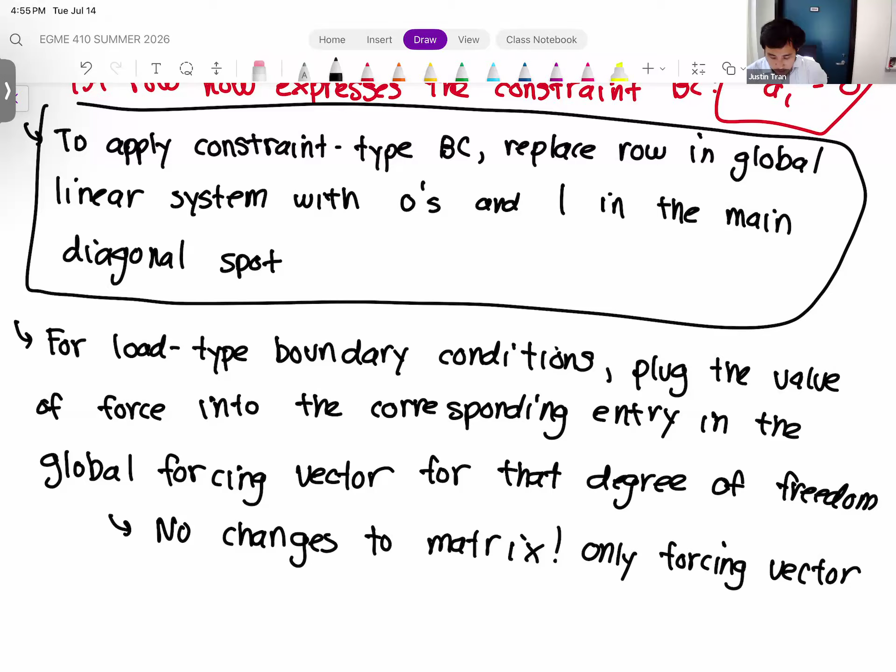So for this problem here, we look at our figure up here. We are applying a force to the right on node 3. That means we're basically going to look at row 3 in the matrix and only replace F3 with F.

So we come to this point right here. Our force or our load is being applied on node 3, right? So that means F3 here is going to be big F.

So we just basically replace the entry in the forcing vector. And then last step, for basically any entry in the forcing vector that we did not replace, or that doesn't have any force or constraint acting on it, we just replace it with a 0.

So in this case, we don't have any force or any load that's being applied on node 2, so we're just going to put a 0.

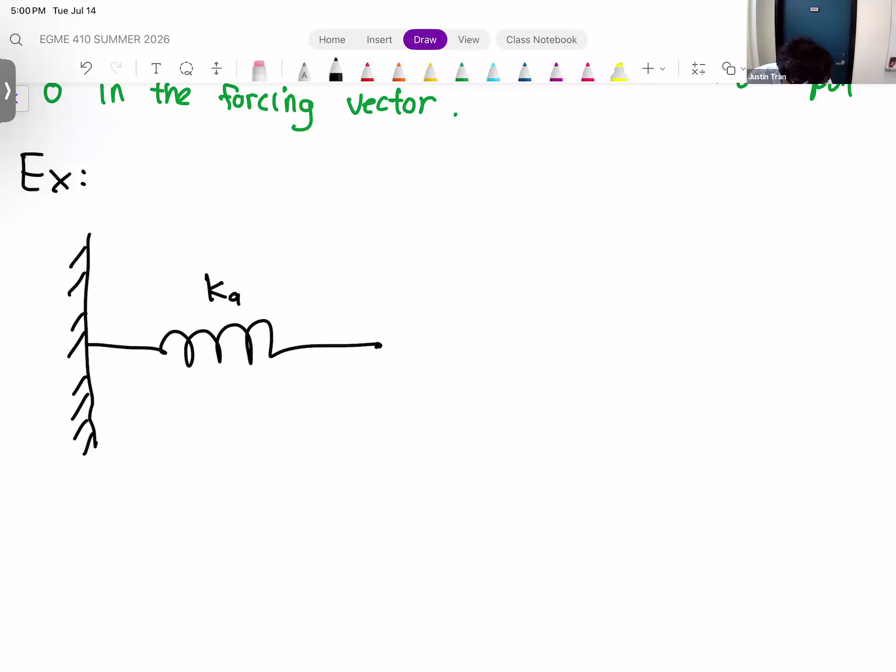We have a fixed wall again on the left-hand side. We have one spring attached to the wall, with a spring constant Ka. This spring is going to be connected to a wooden block. The wooden block itself is not going to deform, but it basically allows us to connect this to two other springs.

So our last two springs are actually connected in parallel: on top we have KB, and on the bottom we have another spring KC. So we have one spring that's in series with two springs that are in parallel with each other.

Okay, let's label the nodes in our system. Just like our previous example, node 1 is fixed to the wall. Our second node is going to be the entirety of the wooden block, because we're going to assume all of that moves together. So node 2 has the combination of KA, KB, and KC all moving together.

But the two right-hand sides of springs KB and KC are going to be free. For KB, the right-hand node is going to be node 3, and for KC, the right-hand node is going to be node 4.

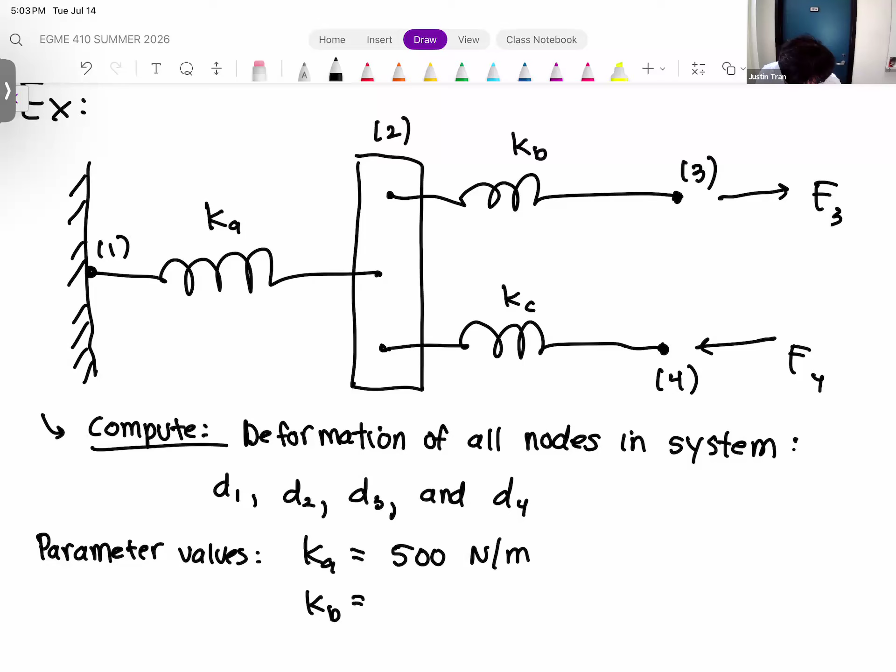Unlike the previous example, I am going to give you some numbers for this. Let's list out what the parameter values are. Ka is going to be 500 newtons per meter. Kb is going to be 100 newtons per meter. Kc is going to be 250 newtons per meter. And we have our two forces. F3 is going to have a magnitude of 100 newtons, and F4 is going to have a magnitude of 50.

Our system now is a little bit more complex, but you're going to see that we're going to apply the exact same process here. So this will be a good review of everything we've talked about today. We're going to compute the element stiffness matrices for each of these elements, assemble our linear system, and then apply our boundary conditions in order to solve for these solutions.

All right, so let's start with the first step. If you're referring back to our original step-by-step process, the first 2 steps have already been done for us. We already have our geometry, and we already have our mesh in the sense that we already have our elements. So the first actual step we're going to do is compute our element stiffness matrices.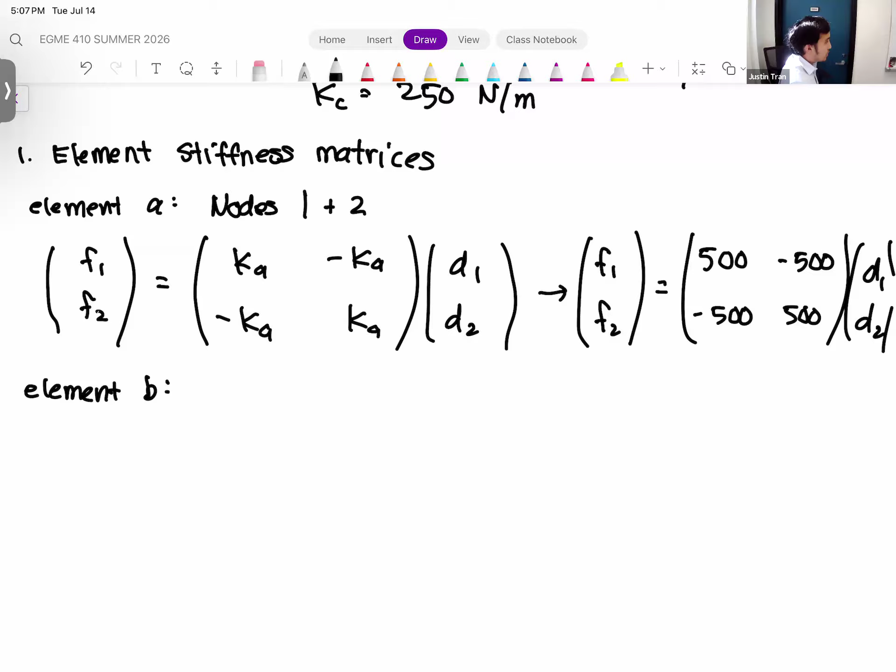Let's do the same thing for element B. Element B has a different spring constant, so we need to account for that, but it's also connected to different nodes. Going back up, element B is connected to node 2 on the left and node 3 on the right. So this is F2, F3 equals Kb, minus Kb, minus Kb, Kb. Kb in this problem is 100 newtons per meter, so it's 100, minus 100, minus 100, 100, multiplied by D2 and D3.

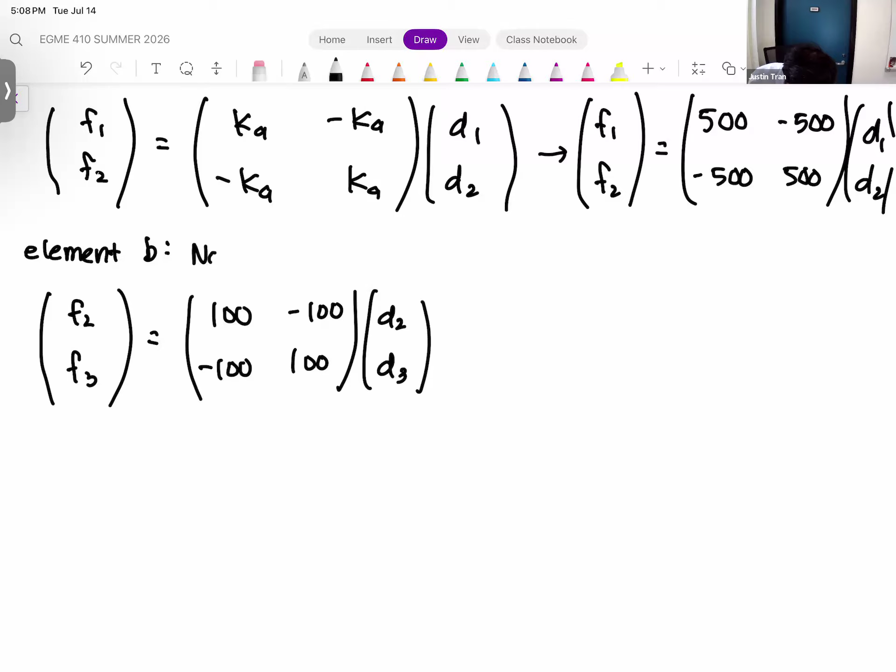Now let's do the same thing for element C. Element C is interesting - maybe not at this stage, but when we go to the assembly. If we look at element C, it's connected to node 2 on the left, part of that wooden block, and node 4 on the right. Those are two nodes that are not consecutive with each other, so when we assemble, we have to be very careful in terms of how we put that into our global stiffness matrix. So this is nodes 2 and 4. We have F2, F4 equals Kc, which was 250. So 250, minus 250, minus 250, 250, times D2, D4.

So those are our 3 element stiffness matrices for this problem: elements A, B, and C. Any questions on how we got these values?

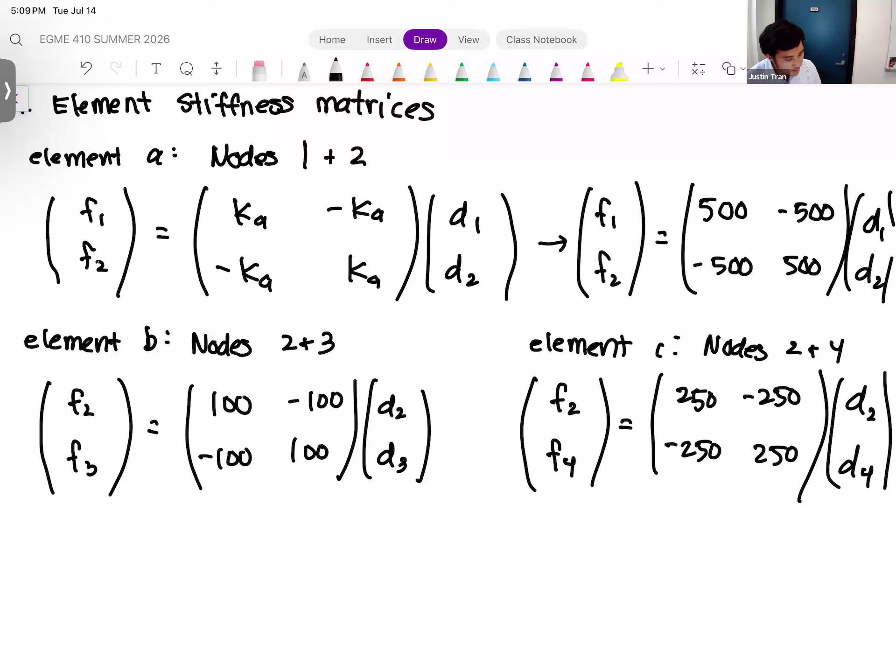So remember, the idea with assembly is to basically combine all of these stiffness matrices into one global linear system that we can use to solve for all of the unknowns. For this particular problem, we have 4 nodes, one more than the previous one, so that means our global stiffness matrix will have 4 rows and 4 columns.

Make sure to give yourself enough room here. You have F1, F2, F3, F4. And so our matrix portion is also going to have 4 rows and 4 columns. So let's do the same thing I did for the previous one, and write the columns in as well so we know what we're looking at. We have D1, D2, D3, D4 for the 4 columns, and D1, D2, D3, D4 for the rows.

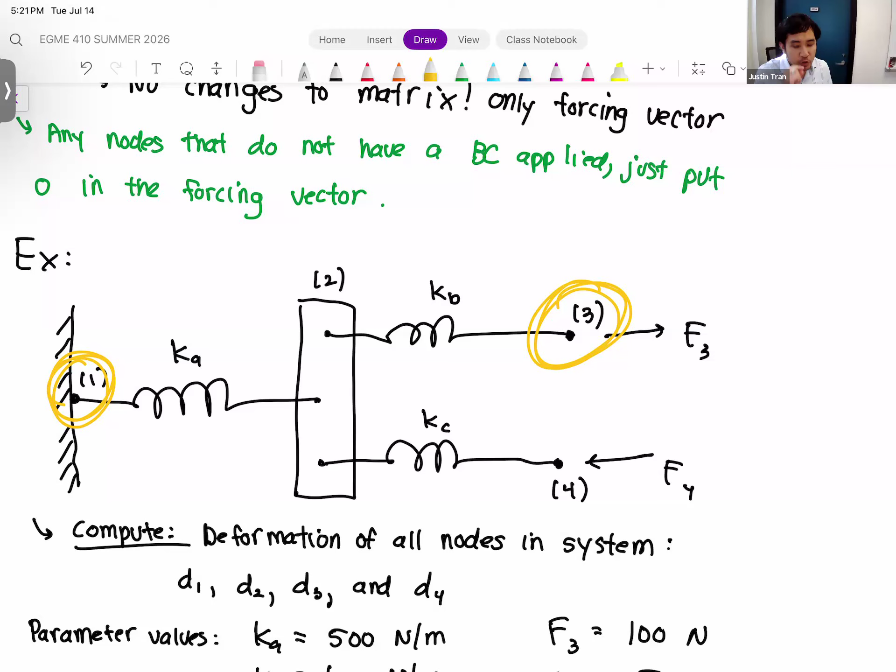And that makes sense, right? If we go back to our problem geometry, node 1 is the one that's fixed to the wall, and node 3 is the one being pulled on the right-hand side. So indirectly they're connected, right? Node 1 is connected to node 2 through element A, and node 2 is connected to node 3 via element B. So they are connected indirectly, or further steps down, but there's no direct connection between them. And that zero represents that fact.

You can look at every single zero in this situation and find the exact same pattern. For instance, the zero that corresponds to D1 row, D4 column - node 1 and node 4 similarly are not connected to each other by an element in any way. Same thing with the zeros on the bottom there. If we look at the zero in the D3 row, D4 column, that means node 3 and node 4 are also not directly connected to each other, which is also reflected in our geometry. So this is a nice check.

You don't have to do this in every single problem, but it's a good way to check your work. Because once we start doing two-dimensional problems, things can get pretty hectic with this assembly. You think a 4x4 system is big, wait until we're assembling these into a 12x12 system - things get really hectic at that point. You really want to check your work as you go along for massive problems like that, so you don't run into issues further down the line. Because it gets harder and harder to find issues with these types of problems the further you get along. So the more often you can check your work, the more likely you are to catch your mistakes and fix them.

I don't think these direct stiffness problems are that hard or complicated. It kind of seems like a lot today just because we're seeing it for the first time. But over the next few lectures, you'll see that direct stiffness is basically the exact same process over and over again. The only thing that's different is how you compute the element stiffness matrices. But the details of how you assemble and apply boundary conditions are all the same. And it doesn't help that it's very tedious.

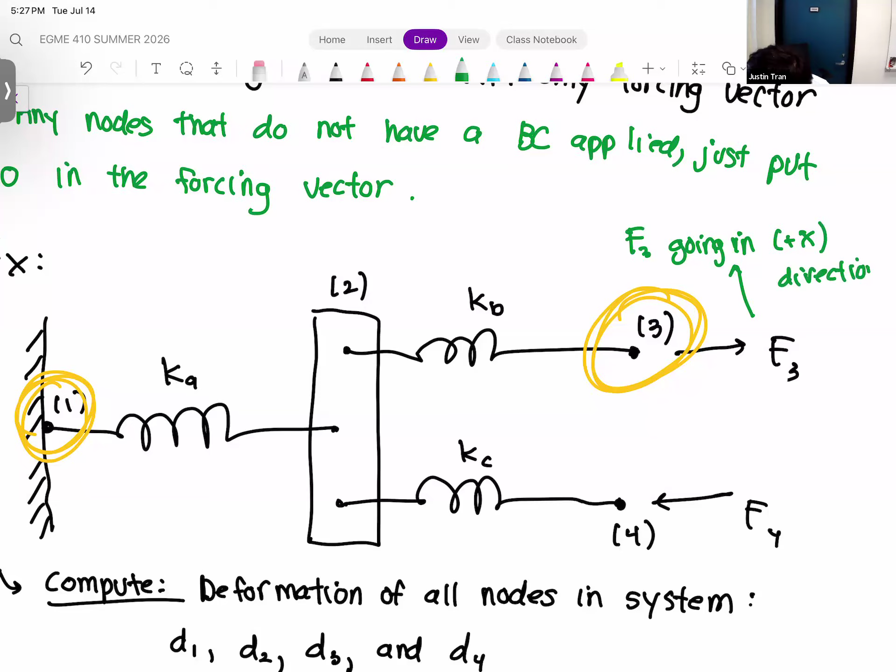So we can say that node 3 is going in the positive x direction. To apply that, we'll go back to our assembled linear system here. For F3, little f3, we're going to plug in the value for big F3, which is 100 newtons.

For the second node, node 4, F4 is a compressive load, but more importantly, this is a load going in the negative x direction. Remember, you have to keep in mind which direction is positive x. In this case, positive x is going to the right. If it's not stated, that's what's implied, positive x always goes from left to right. That means F4 is going in the negative x direction.

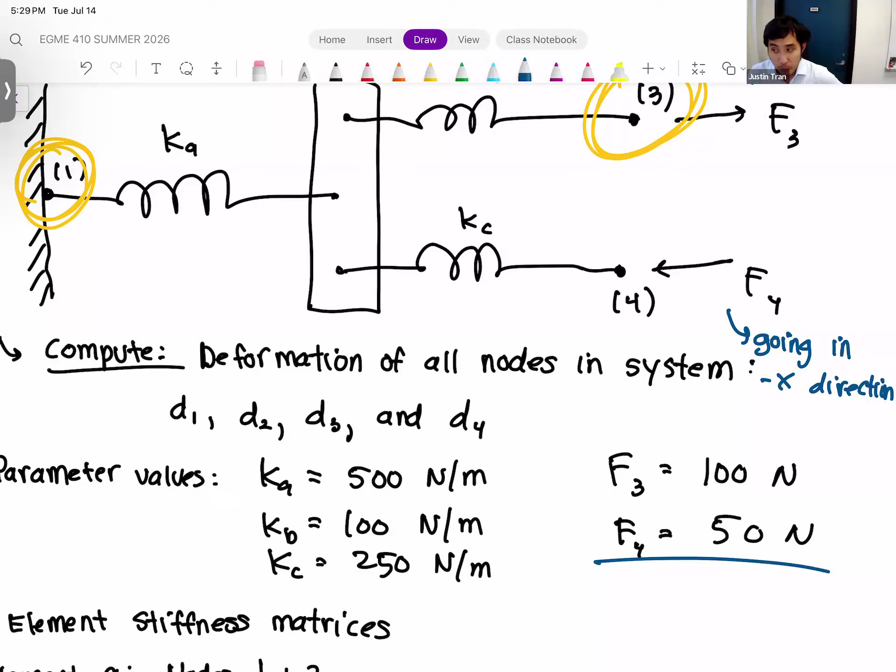When we input the value for F4 into our matrix, we need to make sure we account for the sign. The magnitude of F4 is 50 newtons, but if we account for direction, in our matrix we're not going to put in positive 50, we're going to put in negative 50. So make sure you account for the sign of the forces.

Finally, the last step is that for node 2, we don't have any loads or constraints applied to it, so we just fill in 0 for that entry.

So we have 4 equations and 4 unknowns. Technically, 4 equations, 4 unknowns is not cruel and unusual, so this is one you could probably do by hand if you had a lot of time. But generally I'm not going to make you guys solve these huge linear systems. So 4 by 4 is okay, but we're going to eventually see systems that are like 6 by 6, 12 by 12, sometimes 14 by 14, and those are kind of cruel to solve.